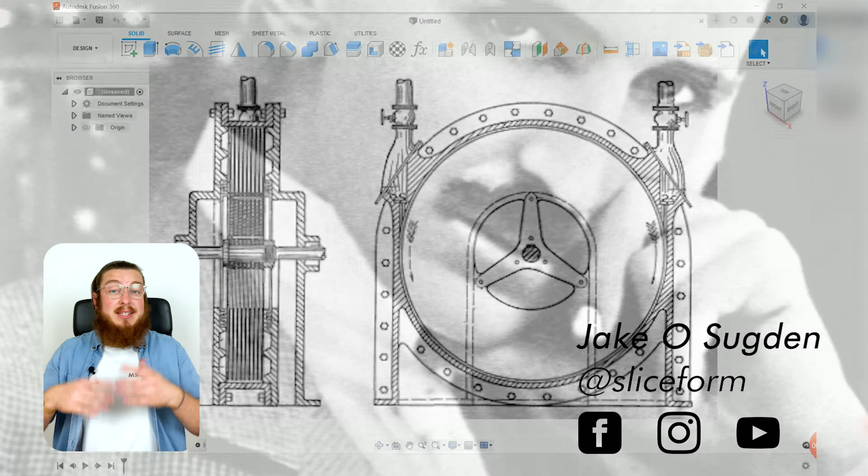So in 1913, Nikola Tesla patented a new type of turbine that he called Tesla's turbine, and it was unlike any other turbine that had ever been made, or to this day. It was a bladeless turbine that could be used to generate lots of power. It was 99% efficient, couldn't produce all that much power, but it could basically last centuries and centuries without needing any maintenance whatsoever. There's actually some Tesla turbines that were made around 1913 that are still running to this day.

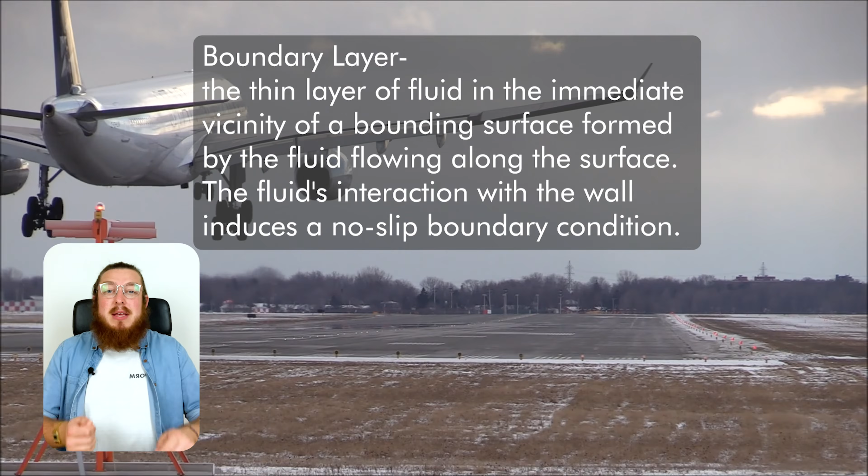This is a really fantastic machinist project if you're just getting into using a metal lathe and a metal mill, and you can make something really, really fantastic. Now, the engineering principles behind this turbine are really, really fun. It's something called fluid dynamics, where you're going to be using a boundary layer effect. Basically, the drag force that a fluid, like air or water or steam, exerts on a surface. And if you blow really hard over a surface, it does drag, it does pull it just a little bit.

So by firing air across lots and lots of discs, the drag force basically starts to spin it. It can't spin with a lot of torque, so it doesn't have a huge amount of power output, but it can spin tens of thousands of times per minute, which is incredibly impressive. Unfortunately, Tesla wasn't able to make it exactly how he wanted to with his time period's material sciences, but right now we can make things as good as he ever wanted it to be. So today we're going to be working from scratch on how to make a Tesla turbine, and then adding in some joints so you guys can see exactly how it would run in real life.

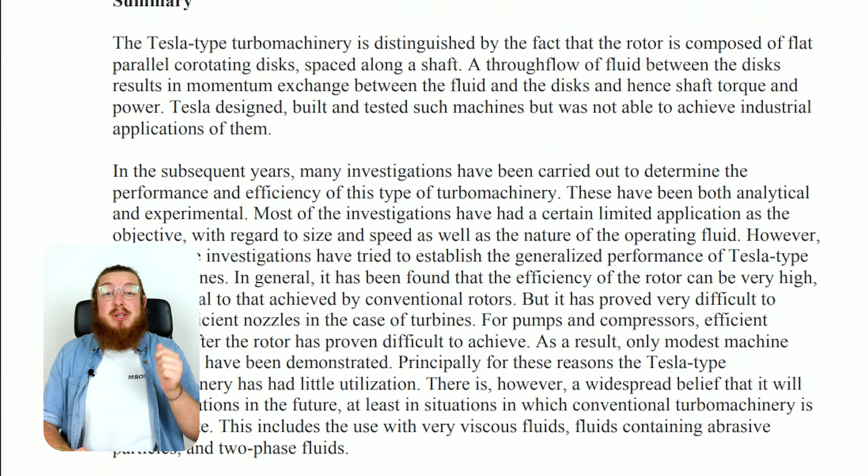Now, the mathematics to build these turbines are really hard. I had to go in a deep dive for one of my theses into Tesla's original patent, and also doing a lot of research on Professor Warren Rice from the Arizona State University, who has done extensive research into this. So big thanks to him, we'll be using a lot of his mathematics and a lot of his ratios to actually produce the best turbine we possibly can.

So we'll be starting off by going up to our data panel, making a brand new folder for our Tesla turbine. This is where we're going to be making all of our projects. And then saving this file as an assembly file. Go ahead and save this, and then we can start on our first component, which is going to be called the housing. This is going to be the large ring that holds all of the pressure inside. Because all of our components are going to be symmetric about the origin, we can be making our housing from the front plane by making two concentric circles, and then we will be extruding them symmetrically on either side.

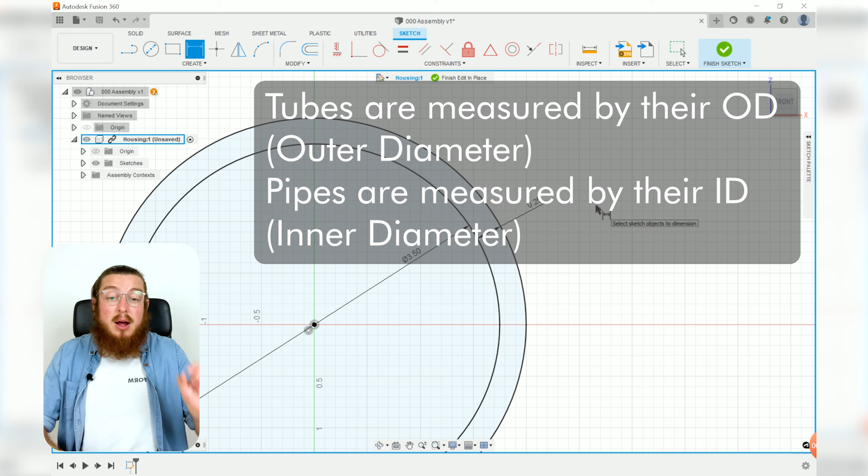We can dimension the inner circle to be 3.5 inches in diameter, and then instead of dimensioning just the outer circle, I want to say the distance between the two is 1/4 of an inch. This is a really important value because anytime you're buying large tube metal, it'll usually say what is the diameter, either the inside or the outside, whether you're talking about a pipe or a tube, and then what is the wall thickness. We're then going to finish this sketch and then extrude this profile, and because we want that origin to be right smack bang in the middle of everything, we're going to be changing our direction from one-sided to symmetric. We want to make the whole length be 2 3/16. We can just say 2 plus (3 divided by 16) in parentheses, and then hit enter.

Now, this housing is also where we're going to be having our steam that will turn all of the turbine coming in from the right-hand side. So we need to be making an orifice or hole in this that is tangent to the inner edge. So let's make that by starting off a new sketch, and we're going to be clicking on the right-hand plane. And we can actually expand our sketch palette and click slice. This will give us basically a slice all the way through our geometry.

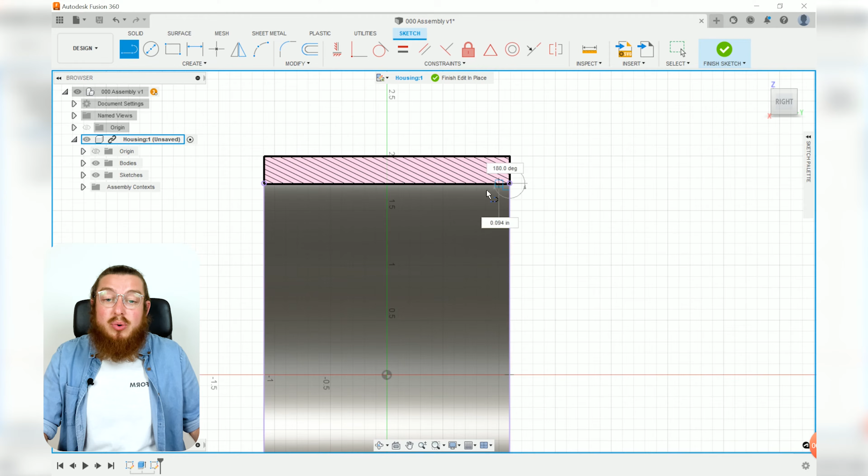And I'm going to click P for project and select this inner surface. That way we can make a circle that is totally tangent to these 2 points. So to do that, we can use our line tool and join those 2 projected points. Then make a circle, and this is going to be 0.84 inches in diameter. We want the center of the circle and our origin to be totally horizontally constrained to each other.

And then we want to add a tangent relationship between the circle and that line that we just made. There we go. Now it's fully defined, and we can hit Finish Sketch.

Now we can flick around our view to the side, and we want to extrude this hole all the way through. We could obviously pull this hole out all the way, or if you'd like, change your extent type to To Objects and then select the outer surface, then you can see that cutting geometry maps perfectly to the curve of the outer surface that we have there. And we can click OK.

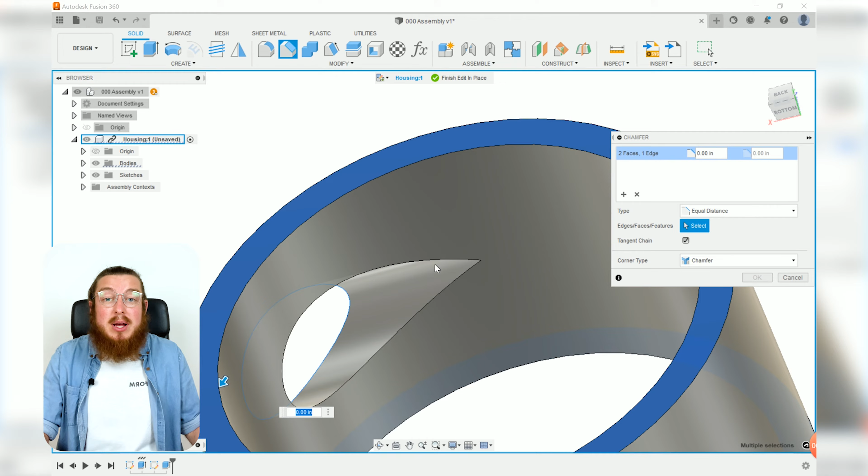We also want to add some chamfers to our piece, so go ahead and open up the chamfer tool, select the two flat faces on either side, and then you want to select the outer edge right here. If you flick around to the inside, you'll notice that as we made a tangent hole, it kind of meets up to a point. So if we add a chamfer to this inside edge as well, those two chamfers are going to cross over each other, and it's going to give us a big warning error. So just two faces and that one edge, and this wants to be 0.04 inches.

So most of these components are going to be made out of aluminum for this project, so we can click A for appearance, and then look up our aluminum, and then click and drag this onto our project. Now that we're done with this component, we can say finish editing in place, and then we want to right click the housing and want this to be grounded.

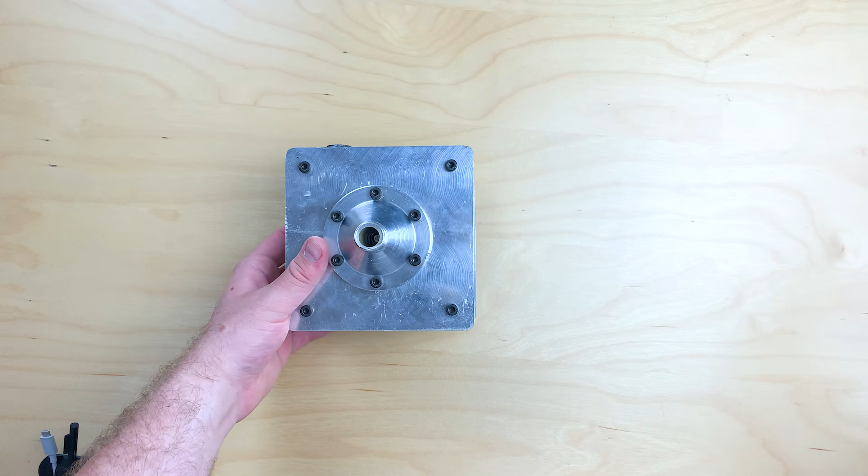So for this component, we are going to be making a sketch on the front plane, and it's going to consist of a rectangle, a very long skinny rectangle, and then a couple lines to make a triangle. Now for all of our constraints, we want this bottom point of the triangle and our origin to be horizontally constrained to each other. And then we also want this left vertical line to be coincident with our origin.

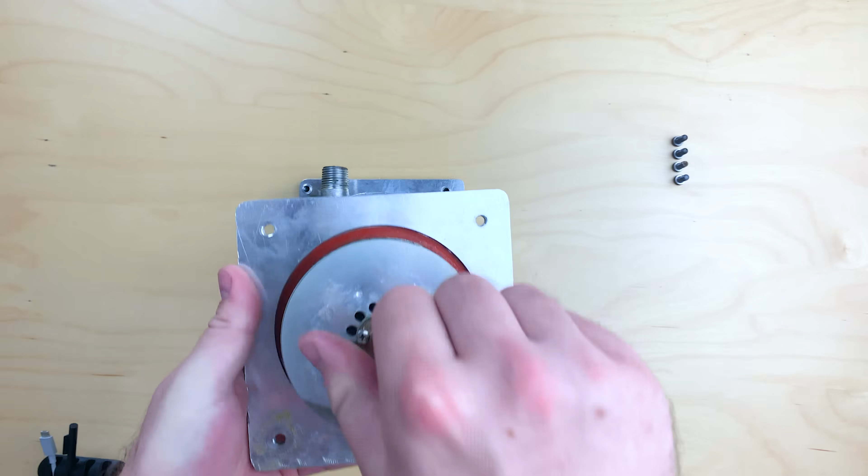Now for all of our dimensions, this outer radius is going to be 0.42 to be mating with that 0.84 inch hole that we made in the housing. The inner radius is going to be 0.31 inches. The entire length of this tube wants to be 3 inches long. And the distance from the most right-hand point of the triangle to the end of our housing is going to be 0.4 inches. And then the angle of this triangle is going to be 30 degrees.

So when we revolve this sketch about the red x-axis, you need to select both of the profiles and then the red x-axis, and this will give us a totally sealed off tube. But what it's going to do is add a pretty perfect funnel for all the steam to be compressed into. And our next step is going to be making a series of holes that we can direct the steam in as efficiently as possible.

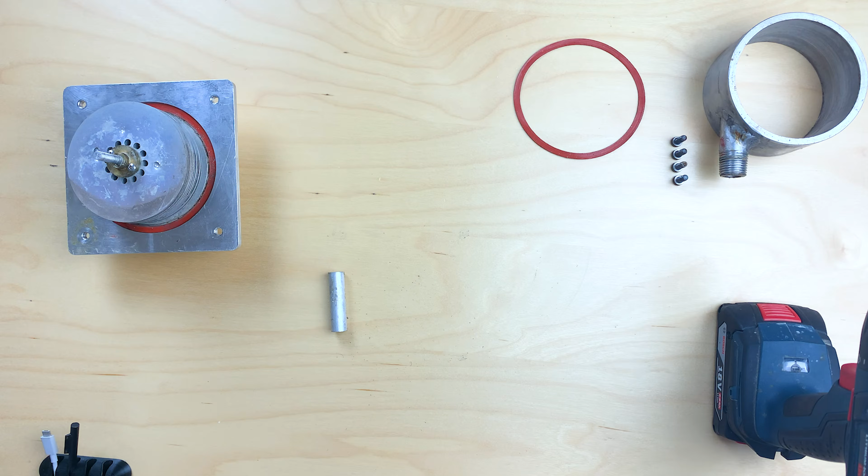So to do that, we want to make a brand new sketch on the end face of our tube. And with our circle tool, we're going to be making 5 circles, all exactly the same size. We can click and highlight all of them and apply an equal constraint to them. And these want to be 1/16 of an inch. That is a perfectly normal sized drill bit that you'd find to do this operation. And then each of them want to be 0.1 inches apart from each other.

What this operation is going to be doing is basically making the inlet totally planar. So we don't have a big hole that's going into just a couple blades. We're actually going to be distributing it along an entire face. The last thing that we need to do for all these is make sure that they can't move up or down. So I'm going to be holding down Control and then selecting all of the origins of all these holes, and then adding a horizontal constraint to these.

And as soon as we finish this sketch, we can extrude all of these 5 holes. And we don't really need to have any dimension specific, just as long as we can click and drag and have it cut all the way through, that's fine. And then as you can see after hitting OK, we do in fact have those holes cutting all the way through our piece.

Now very often steam is being run through high pressure, high temperature resistant pipes. And anytime you're in America and you're talking about pipes, there is in fact a pipe threading standard called NPT. Unfortunately, we don't have this capability for external threads within Fusion 360, but we can get pretty close by adding an ISO pipe thread. The only difference is that the TPI is slightly different, and US NPT pipe threads actually have a taper to them, making it easier to basically screw in.

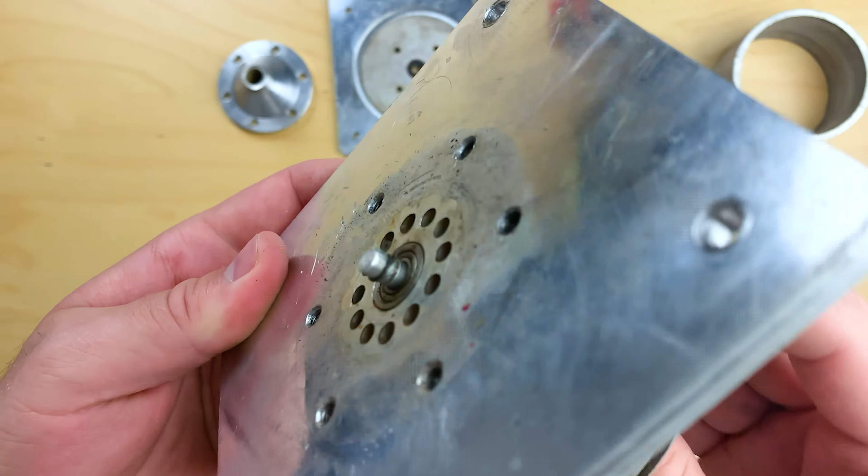And then we'll just click and drag this where it's supposed to be. We can click P for project and then select the outer edge, where we can make this collinear to. And because we know the outer diameter of this piece is 0.42 inches in radius, we can just type that in based on the distance to the origin. Then we can have a revolved cut for all of this about our red x-axis. And as you can see, this gives us a very nice large chamfer.

Now this part is also going to be made out of aluminum, so we can click A for appearance and type in ALUM, and you can see it's popped in right there. And if you find that you use this appearance all the time, you can always right click and add it to your favorites. I already have it in my favorites because I use it all the time, but instead of having to type it in every single project, just add it to your favorites. It saves a ton of time.

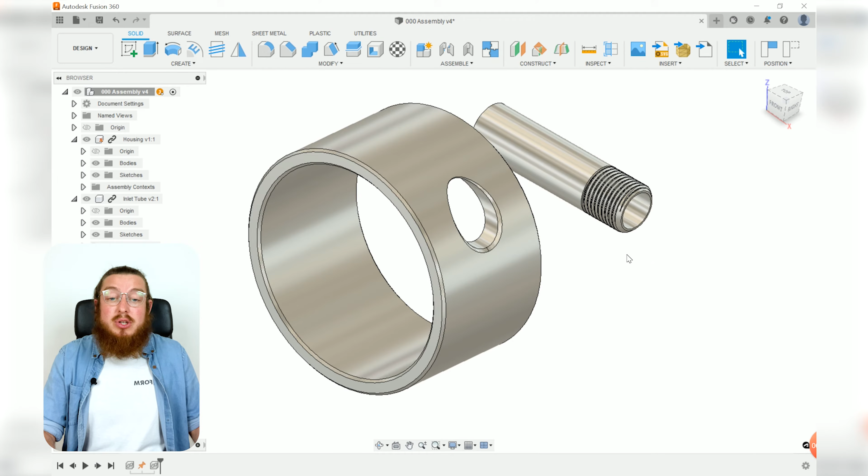But we can close this out and save this file, then head back to our main assembly and update this file. So now that we have our two components, our main housing and our inlet tube, we can click and drag this around in a way that's not ideal. So let's add a joint between these two. We want a joint on the outer edge of our circle, and even though this is not a perfect circle, we can actually click on it. As I move my cursor around that curved hole, there are these two endpoints I can snap to, and that's where I want to click. Then it moves it over.

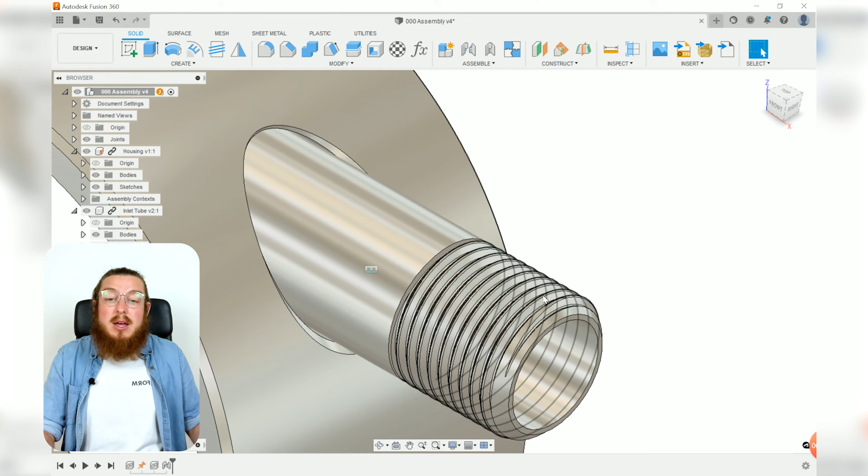But this is still set to a revolute joint from the pizza cutting class, so we'll just make this into a rigid joint. We also want to click on one of these arrows and pull it out a little bit, because we want to get access to all those threads. So we'll be pulling it out 1.25 inches and then clicking OK. As we can see with our two components, our inlet tube is actually crashing into the inside of our housing, which we really don't want.

So we can use the edit in place window to help us cut out this section, because it's going to be based on the geometry of the outer housing. So we can go over to our browser, put our cursor over our inlet tube, and click the little pencil icon. And then we can make a new sketch on that front plane, which, as you remember, cuts right through the very middle of the housing.

Then we can click P for project, and then select the inner surface, or the inner ring. There we go. And then click OK. And now we have a profile that we can now extrude cut symmetrically. If you change your direction to symmetric and then pull it either side, you can see that we completely cut away the unnecessary material for our inlet tube. And then by hitting Finish Edit in Place, it is now perfectly cut.

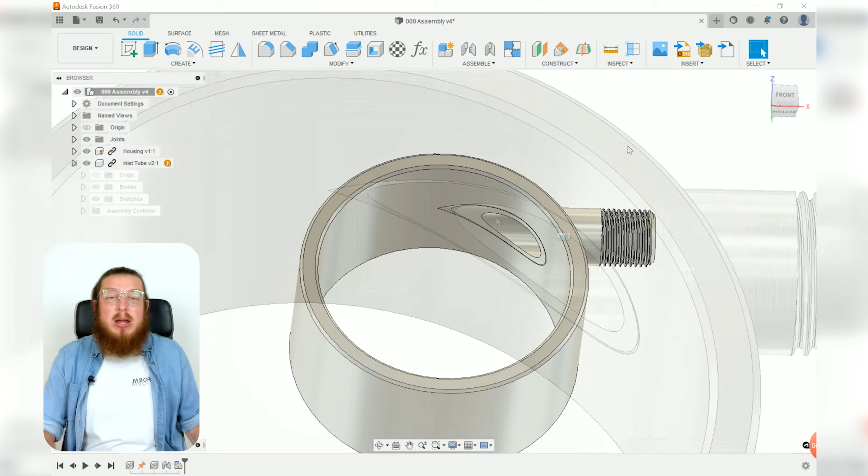Now our next components are going to be two gaskets that you can find on either side of the wall. These are basically two rubber discs that we can apply pressure to, and it will hold the steam in really, really well. They are two very simple components, but they need to be in the right location or else they won't work. So we'll be making a new component, and this one can just be called gasket. And after we click OK, we can make a new sketch, not on the front plane, but actually on the outer face of our housing. Then we can use our project tool and select the very outer and the very inner edge and click OK.

Now this gasket does not need to be very thick, so we can just finish the sketch and then extrude out these profiles. And we just want to pull them out 0.03 inches. Again, gaskets do not have to be very complicated, but they are very important. If we didn't have gaskets, then we wouldn't be able to hold in any pressure or any fluids inside any of our mechanical systems.

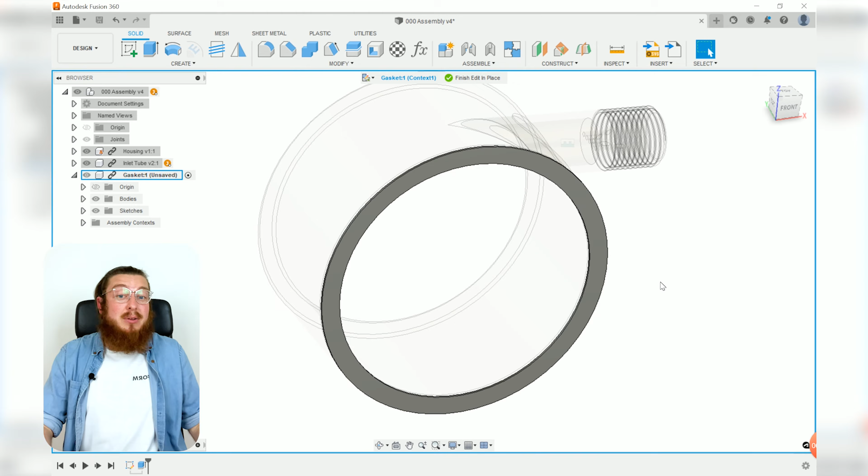We can also add in an appearance. Gaskets are usually made out of either cork or rubber. So I'm just going to be adding in a soft rubber appearance to this. And very often, gaskets come in all different colors. One of them that's really common is a bright red. So we can double click on the rubber and then change around the color to the top left corner. And this will give it a really nice, lovely red.

Now this component is all done, we can say finish editing in place, but we do want a gasket on the other side. So instead of having to make another one, we can actually just click M for move and select the component of our gasket, and then move it over with our create copy already checked. And we can move it over until it's about in the right location and then click OK. Now our right gasket is in the correct location, so we can make it fully solidified by using the as built joint by selecting the housing and then the component itself and then clicking OK.

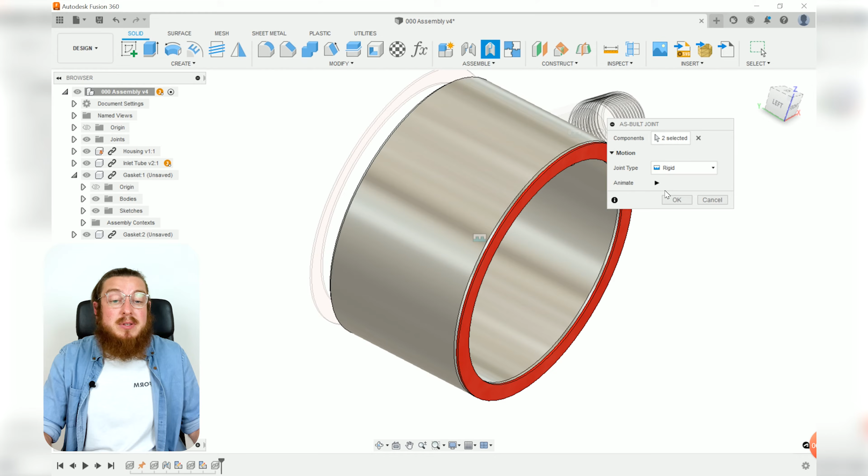But our other gasket is kind of free floating, and this is where we can put in our joint. We want this face to be fully secured with our housing, and we want our joint origin to be right at the very middle. So we can select either this outer edge or this inner edge, but it's really important we select on that wall. Then we can flick around the other side of our housing and select either face or either edge. And then those are fully mated, and we can finish off by clicking OK.

Now in an industrial setting, gaskets are usually made just by punching them out with really big steel knives. But another way to cut gaskets is just to laser cut them. If you go down to your local library, there is a good chance that they actually have a laser cutter and a set of 3D printers that you guys can use.

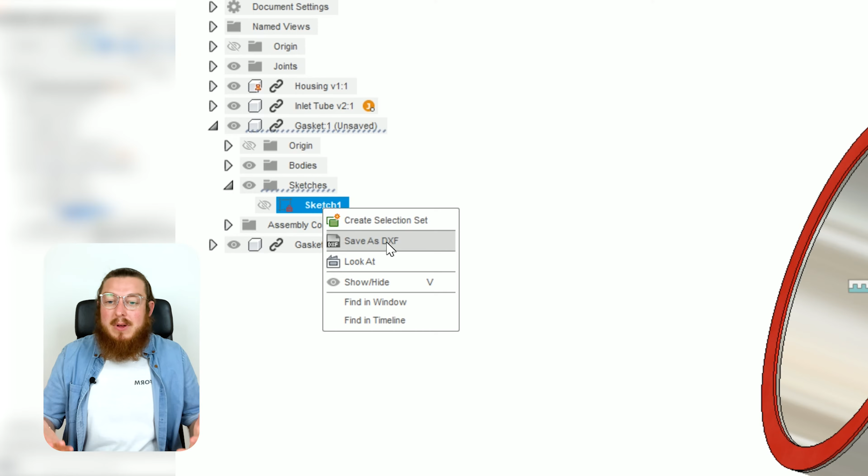So in the gasket, in the browser, we can actually expand the sketches area. So it says sketch 1, we only had one sketch, and then right click it and you'll be able to see we can save those two circles that are the right dimension as a DXF. This is kind of like a 2D PDF vector that laser cutters can use really efficiently. So you can save that if you'd like to make this in real life and if you have access to a laser cutter.

Now our next component is going to be our central axle. This is what all of our discs are going to be held to, and it's what's going to be revolving around all of our housing. So we can make a new component. Like I said, this one is going to be called the central axle. And we want to be making this as its own separate file. So we don't even need to finish it in place. We can just save this file and then open it up as its own standalone file.

To make this project, we can just go into Create, Cylinder, and then select on the front plane. Remember, this is going to be extending away from us. So we can click on the origin and pull outwards. This is going to be a 0.25 inch diameter rod. Hitting enter, and then we want to be extruding it 3.5 inches.

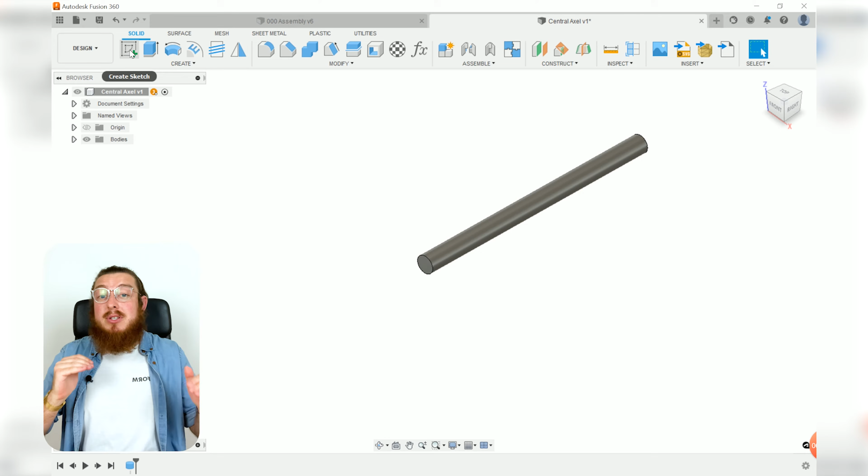Now we're going to be having some cutouts on the top and on the underside of this central axle, and that's how we're going to be joining all of the discs to some of the mounting hardware to the central axis. These flat sections are going to be a really good area for some set screws or grub screws to tighten down really well. So to make these, we're going to be opening up a new sketch on the right-hand plane this time. I'll be making two rectangles.

And these are going to be having the exact same width and the exact same height. We can also add in a collinear relationship to the underside of both of them. So as soon as we move one of them down, it moves the other one down as well. So to dimension these, we want to say that the underside of these rectangles to the origin is 0.1 inches away. We can say the distance from the left-hand side of the left rectangle is 0.45 inches away.

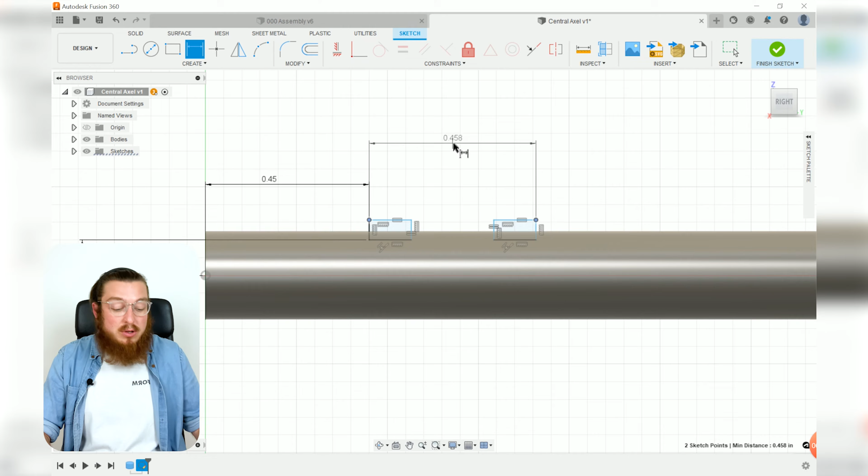The distance from the outer edges between the two rectangles is 1.94 inches, and the width of both the rectangles are 0.2 inches. Very, very small. We don't really care about the height of this rectangle. As long as it's above our central axle, that's fine, because we're just going to be cutting them through. We can finish this sketch and then extrude out those two profiles, and we want to be making these symmetrically extruded out either way.

We can click OK for this, and then we want to mirror that feature, that extrusion, about the very top plane. So we have two of the flat sections on top and two of the flat sections on the bottom as well. And because this central axle needs to be really incredibly strong and it needs to withstand a lot of rotation and a lot of torque, instead of aluminum, we are going to be adding a stainless steel appearance to this.

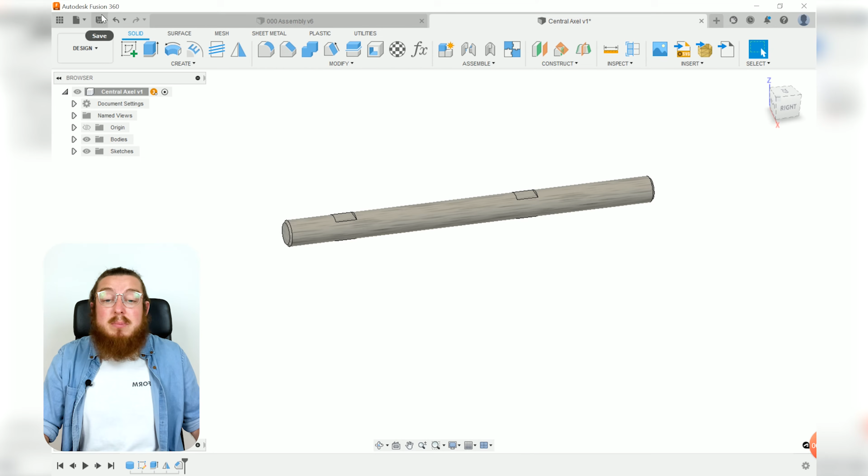Now we're going to be adding some chamfers to the ends of our edges, so they're not super duper sharp. These can be 0.02 inches, nothing too major, and this component is all done. So we can save this and then go back to our assembly file and update it. But because this is a part of a sub-assembly, I don't actually need it to be right in the middle of all the other components.

This is actually going to get in the way really quickly, so you can just click and drag this away from it. So we'll be having basically two different sub-assemblies. That will be the housing, or the stator, and then all of our discs, which will be the rotor. So the stator is stationary, the rotor is rotating.

Now our next component are going to be things called brass shoulders. These are basically going to be two large chunks of metal that we can pass a thread through, and so when we put in all of our discs, these will be able to compress and add a good sense of stability to these. Brass is a really easy material to machine in metalworking, but it also has a pretty substantial density.

So when we have all this high RPM, because we have such a high weight associated with it as well, we can produce much more torque. But all of the weight is going to be closer to the central axis, so we have a higher sense of stability with it as well. So we can click OK, and just like before, we are going to be making this not in the Edit in Place window, but as its own standalone file.

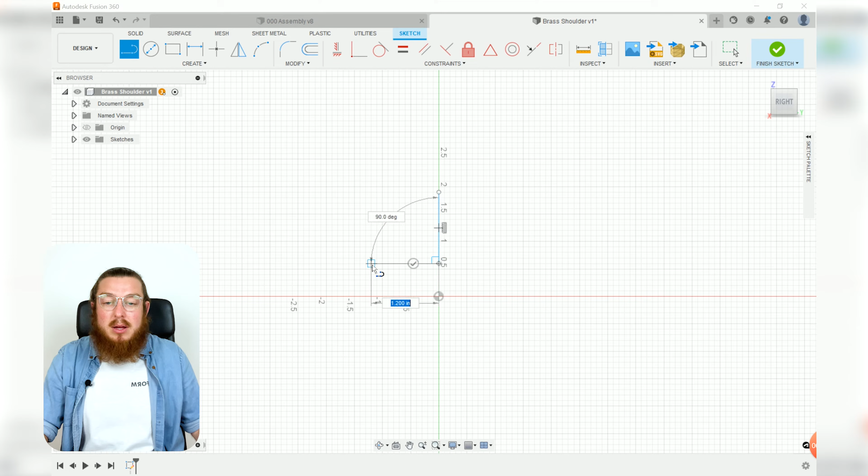Now to make this revolved part, we're going to be making a new sketch, and we're going to be working on the right hand plane, so all of our components are about in the right location. And using our line tool, we are going to be making kind of a letter L on the left hand side of the origin. As far as constraints go, we're going to be adding an equal constraint to these two top horizontal lines, and we're also going to be adding a coincident relationship between this vertical line and the origin.

Now, as far as dimensions go, we want this to be riding over the central axle. So we're going to be making this radius 1/8 of an inch.

We also want to make this top flat section 0.2 inches. We want to make the outer radius of this little shoulder right here 0.225. And the entire radius of this back section is going to be 0.45 inches. So we're going to finish this sketch and then revolve this profile around the green y-axis.

And then we need to have two holes, one on the top and one on the bottom, to allow for two really long bolts to pass through. So we're going to make a new sketch on the front plane, and our two circles are going to be equal diameter. So you can just add a little equal constraint to both of those. And then we also want them to have a vertical connection to the origin as well.

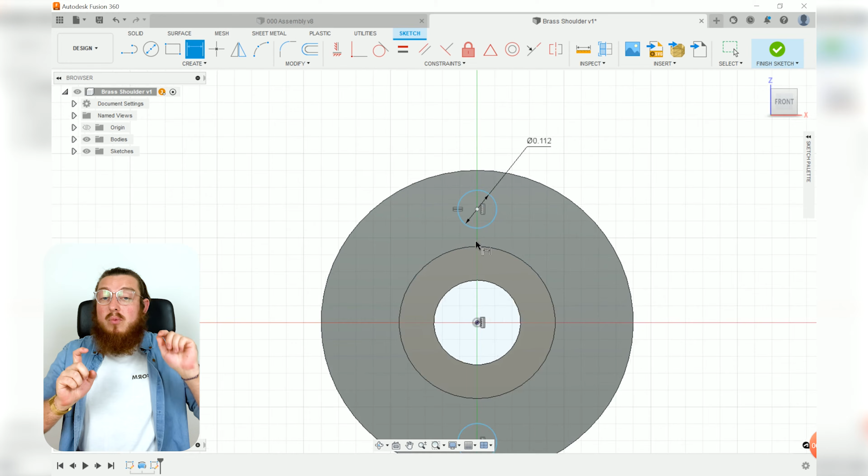Now the diameter of this circle is going to be 0.112. This is a funky number because it's going to be the drilled diameter of what is going to be tapped, which is always kind of a strange one. But the distance between the center of the circle and the origin is going to be 0.338. And that's going to put it smack bang in the middle from this top point to the top of this outer circle. And we're going to do the same thing for the underside.

We can now extrude these two profiles all the way through our parts. Again, doesn't really need to be anything too crazy. As long as they cut all the way through, we'll be okay. We also need to add two drilled holes that go perpendicular to our axis. So we're going to make a new sketch, this time on the right plane, and we can also cut it in half if we'd like. So we can always click slice in our sketch palette.

And we're going to be making a circle that is horizontally constrained to the origin. And this is going to be 0.112, the same diameter as our upper pieces. We can project this entire internal bore. And then we know that the center of the circle wants to be 0.1 inches from that outer face.

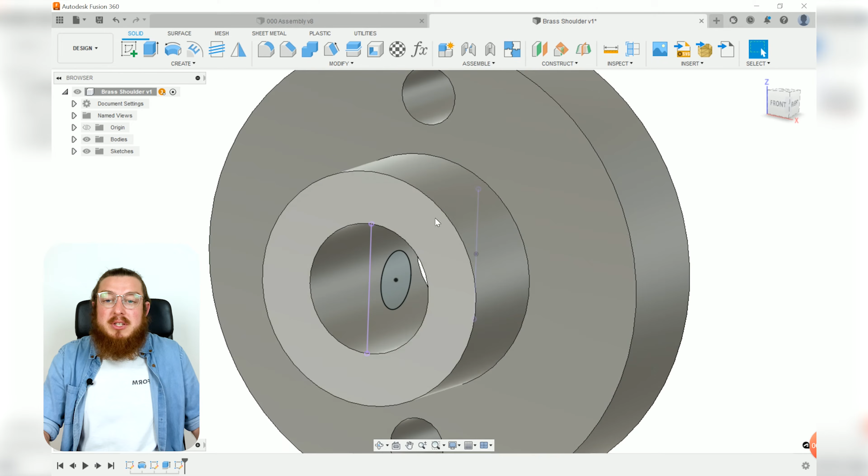Now this circle that we've made wants to be symmetrically extruded either side. So go ahead and change your direction to symmetric and pull it out so it cuts all the way through either side. And then we want to add a nice little chamfer over the entire thing. So go to your chamfer tool, highlight your entire piece and make it 0.01 inches. There we go.

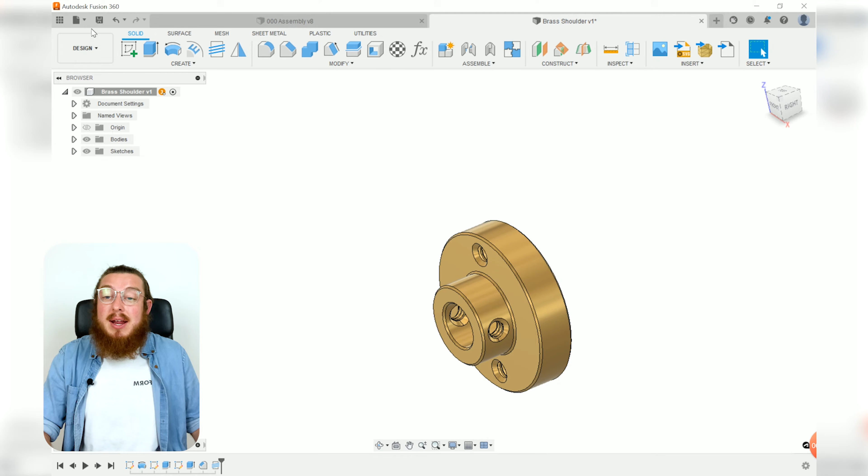Now we're going to be adding a threaded feature to all of these holes that we just made. So we can select all of these inner faces while holding down Control, and it should automatically go to a 4-40 unified thread. We want this to be a threaded feature, and then we can just click OK. And because this is a brass shoulder, we want to go ahead and add a polished brass appearance to this as well. And this component is all done. So let's go ahead and save it, and then go back to our assembly file and update it.

So we can click and drag this brass shoulder over to our central axis, and this is where we can add a rigid joint to it. So add your joint, and we want to click the outer edge of our brass shoulder, and we also want to do the same thing to our central axis where the notch is closer to the edge.

And as soon as we do this, we also want to rotate our piece 90 degrees so that the threaded hole lines up with the flat section on our central axis, and we want to pull this in 0.45 inches. This is really nice because it means the very center of our bore will go right into the dead center of the flat section that we made in our central axis. And then click OK.

Now the next component that we make, this will be the really important one. We are actually going to be making the discs which will actually be able to spin our rotor. So let's make a new component. This one will be called a rotor blade. Click OK, and we want to make this in its own separate tab as well. For this sketch, we want to make it on the front plane.

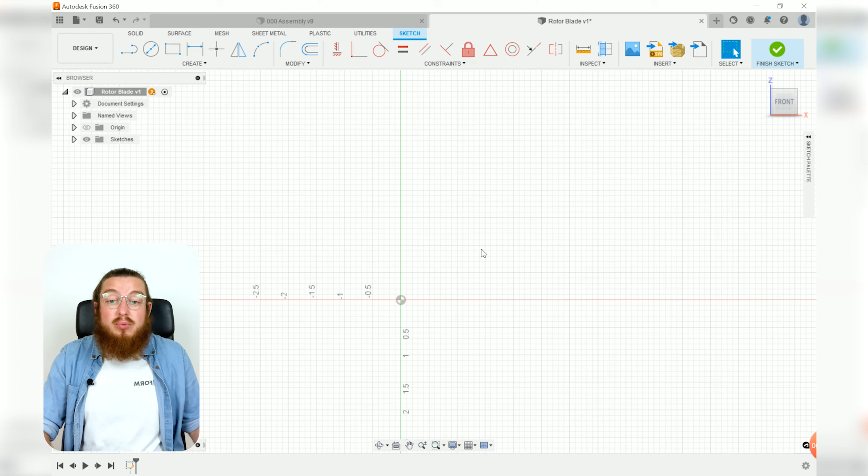And because this is a rotor blade, we're going to be using the circle tool to make a really large outer circle, another smaller concentric circle that will fit over our central axis. We want to make two small circles on either end that will be passing through our brass shoulder, and then one larger circle just above.

We can add all of our constraints to these, so we can click the center of all of these three horizontal circles and add a horizontal constraint to that, and then one vertical constraint between these two circles as well. So we'll start off our dimensions by setting this inner circle to be 0.25 inches. That will go over our 1/4 inch axle. These two circles will end up being 0.125 or 1/8 of an inch, and we can also add an equal to both of these circles so they become the same diameter.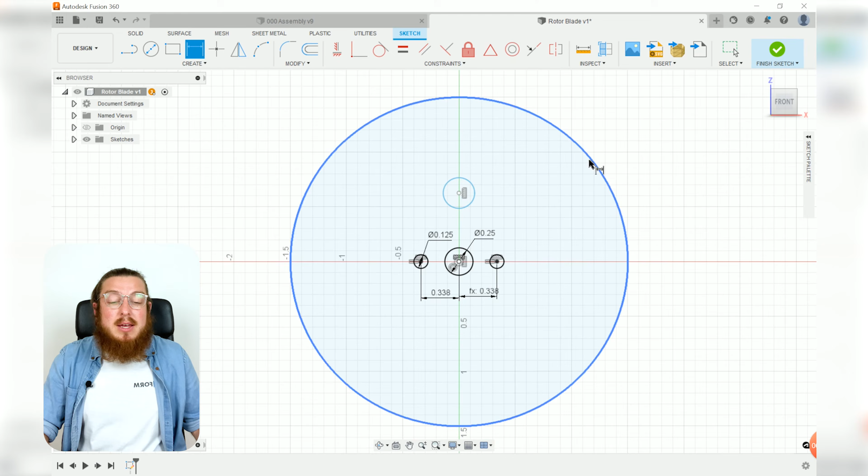We also want to set the distance between the origin and that circle to be 0.338 so that it lines up with the holes that we drilled out on the brass shoulder. And we'll do the same thing for the other side. Now this outer circle here, this is actually fairly interesting. So this has to fit inside the internal diameter of our housing, so 3.5.

But because of all of the fluid dynamics, we want it to be just barely smaller. In fact, we want it to be about 2% smaller, so that we still have some wiggle room so the blades don't accidentally rub up against the inside of the housing, but we don't want to have any fluids, or minimal fluids, actually just spinning around and not exiting through our system. So we can type in 3.5 multiplied by 0.98. That'll give us the 2% smaller that we're looking for.

Now this top hole right here, which we will dimension to be 0.188 in diameter and 0.55 inches up from the origin, this is going to be our exit hole. This is where our steam is going to be passing through our discs and then out of the housing essentially. But just one hole isn't going to work for us. We need to add a fair few more. So let's go to our circular pattern, select our circle, our center point is going to be our origin, and then we're going to be making 6 of these holes.

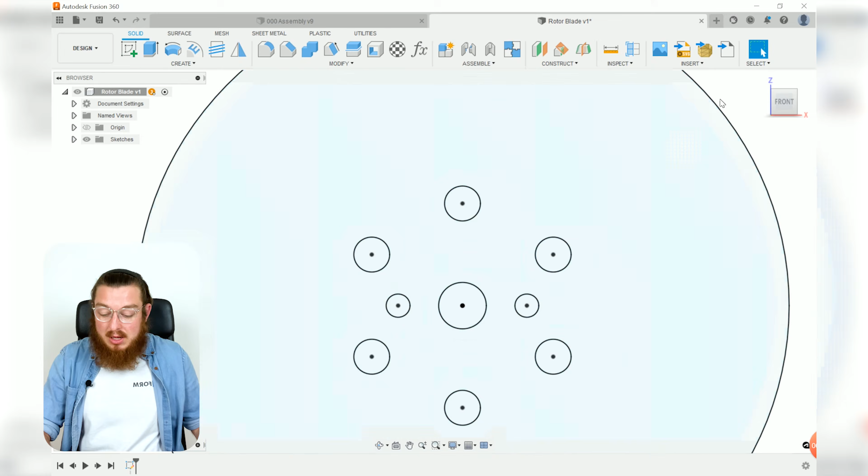So with the sketch all done, we can finish it and then extrude this surface 0.015 or 28 gauge aluminum. We also want to be adding on one of our polished aluminum finishes to this, as these are made out of really thin aluminum. And then we can save this part and then go back into our assembly, and this is where we can fit it over our brass shoulder down there.

So we can bring that over, and we want to make sure that in our joint this face and this edge line up with the underside of this bolt of our brass shoulder right there. So this will mean that both the rotor and the brass shoulder are absolutely perfectly fit together, and they both line up on the same axle.

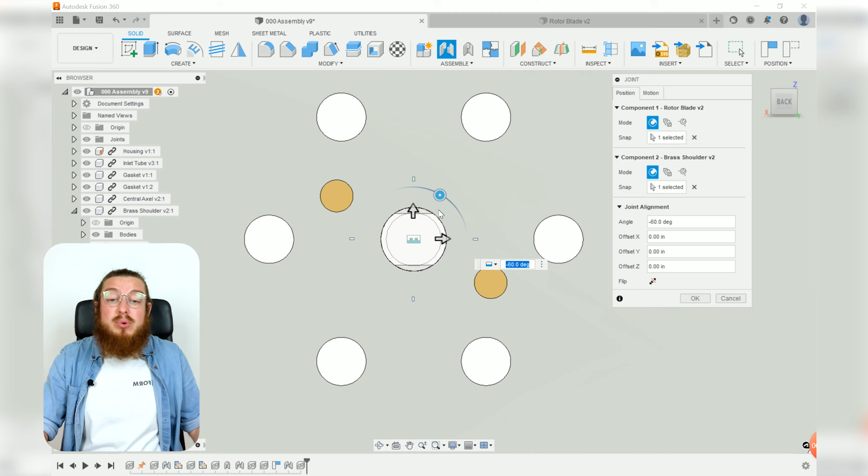We also want to verify, if we go around to the back view, that yes, the holes that we have going through our brass shoulders and the holes that we have going through our rotor blades are totally aligned. If for some reason when you were making this, it brought it in sideways, then you wouldn't be able to see the through holes, which we don't want. So we can just click OK for that.

Now our next components are going to be the spacers that fit in between one of the discs and then the next discs. And these can be made out of the exact same material. And the reason that we chose such a thin bit of aluminum is because, funnily enough, the ideal width between two discs, or that gap, which is the most important part of this entire turbine, is 2 times the thickness of this blade. So for every gap in between them, we'll just insert 2 of these spacers.

So let's make a new component. We're going to be titling this the Rotor Spacers. And again, we're going to be making this as its own separate individual file. For this component, we are going to be making a new sketch on the front plane. This will be a large 0.9-inch circle. This is basically just going to crest just below those 6 holes for the outlets, so these spacers don't block the steam from exiting.

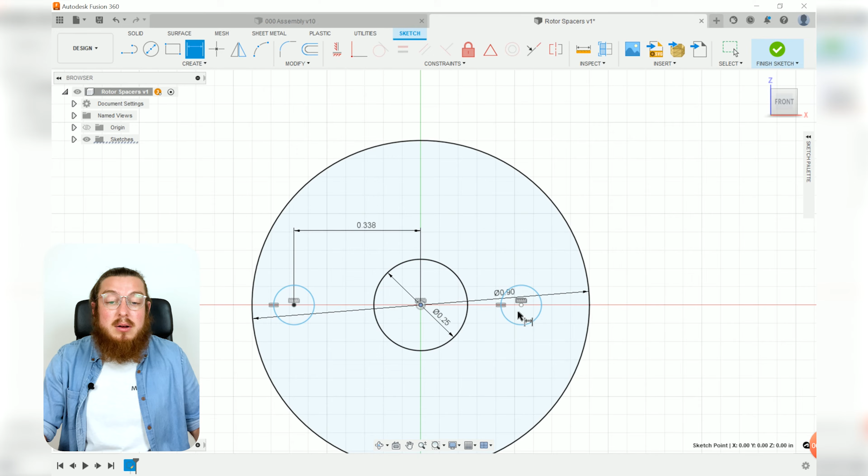We're also going to be having a central 0.25-inch hole going through the middle that will slide over our central axle. And then we also want to have 2 circles on either side. These can be totally equal in diameter, and we can make the very centers of these 3 circles totally flat. Oh, there we go as well. The distance from the center to these circles, again, is going to be 0.338 on either side. And then the diameter of these holes is going to be 1/8 of an inch.

And then when we exit the sketch and then extrude it, it's going to be to the exact same thickness, so 0.015 inches. Again, this is always going to be the same material, that polished aluminum that we have. And this component is all done. It's a nice and fast one, which we like.

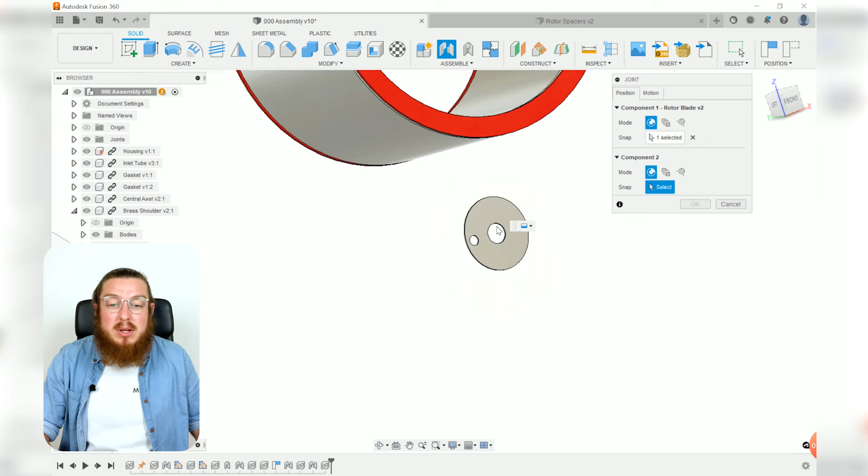Going back to the assembly, we can update this. Our component is going to be, there we go, it's a little hiding. And then we can add our joint. So again, we can add it to the inside face. There we go. And then we'll flick around to the other side of this joint and select it there. And then when we click OK, if we pull it out, we can see that we've got our rotor disc right here, and then our spacer just in front of it.

Now, like I said, we do want to have 2 of these. So I'm going to click M for move, and I'm going to select the spacer as the component that I want to move, but I also want to duplicate it. So let's check create copy, and then let's move this out the thickness of our material. That would be 0.015, and then click OK. And as you can imagine, because it's already in the right location, we can just use an as-built joint to connect these 2 components, and then click OK.

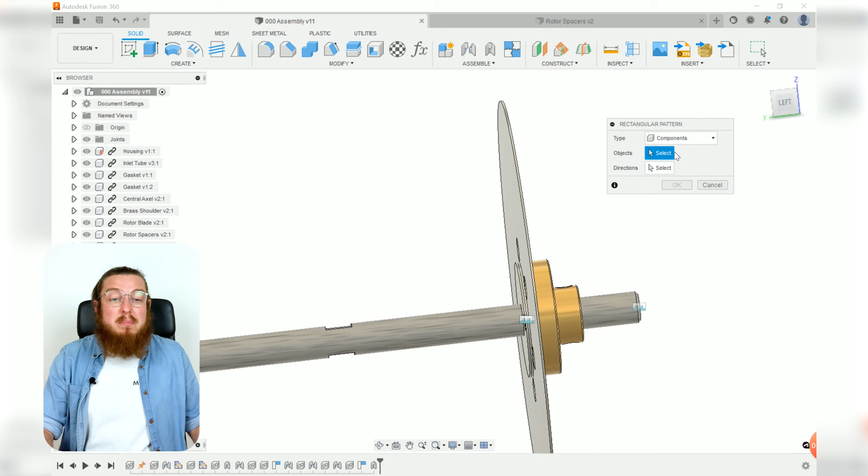Now, just one disc is not going to be tremendously useful. We're not going to get a ton of power output out of this, so let's add a bunch of them. In fact, we need to add 25 more of these. So we're going to go into our Create menu, Pattern, and then Rectangular Pattern. For our type, we want to change this over to Components, and the objects that we would like to multiply are going to be this large rotor disc, and then our 2 smaller spacers. You could also go to your browser and select these 3 as well.

The direction that we would want to pull it is going to be in the green y-axis, because we haven't rotated this subassembly at all. We've just translated it within the workspace. We can pull them away. Like I said, we want to make 25 of them total. And then instead of the extent, we're more worried about the spacing. We want them to line up and nest really neatly. So the spacing between all of them is going to be that 0.015 multiplied by 3. We don't need any in the other dimension, so we'll just leave that as 1. And then click OK, and you can see we have all of our discs in place.

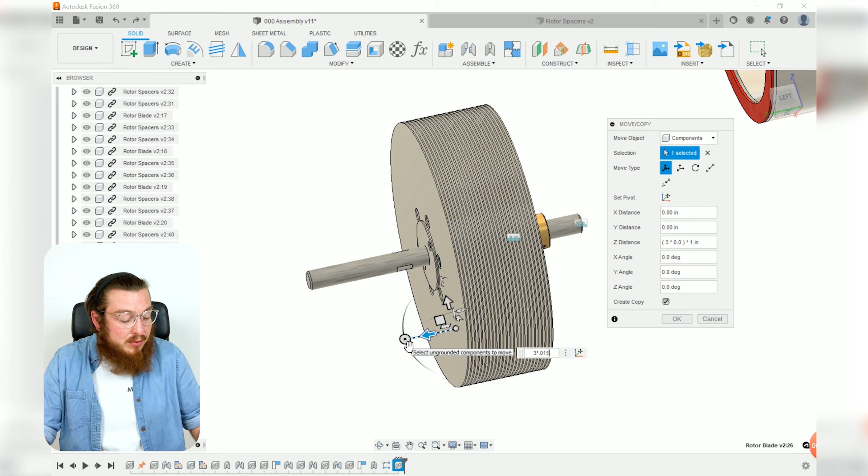Great. And then to finish off this stack of discs, I'm going to click M for move, select the most recent disc. I'm going to say create copy, and then pull this out the distance of 3 times 0.015, which will line up perfectly with the rest of all of our discs.

There we go. Now currently, if you take a look at the browser, you'll see every single spacer and disc that we have is now on one gigantic list. And instead of the browser being a really organized place to see all of your components and sketches and everything associated with it, it is now just a jumbled mess. It's a minefield of really, really difficult things to see. And to be honest, I don't care about most of these components. Rotor spacer v2.6, I don't really care about it. So you may as well compress all these into a single sub-assembly. And that's exactly what we're going to do.

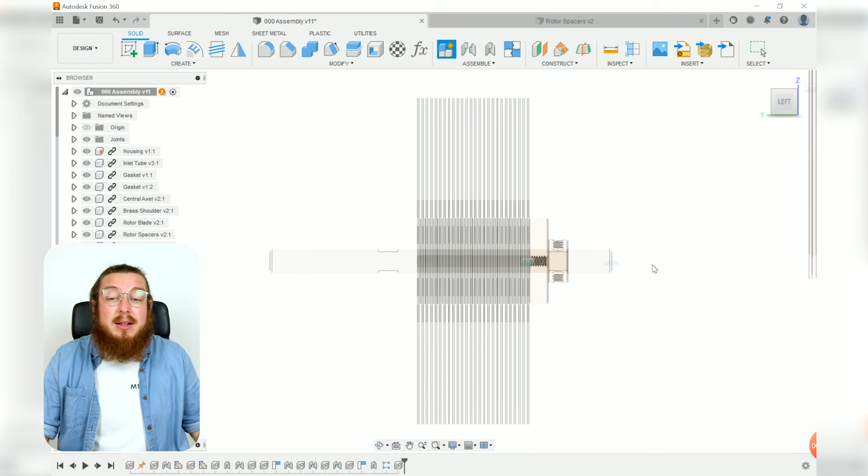We are going to be making a new component. This time it's going to be an internal component. And we can basically group them all together to say all of the discs and all the spacers are in this internal sub-assembly. It is internal because it is inside the main top file. So by clicking OK, you'll see it pops up right at the very bottom.

So we want to highlight all of these inside our browser. So we can select the very top rotor blade that we have, scroll down to the bottom, hold down Shift and click the bottom rotor blade. This will highlight all of the discs and spacers in between. And then we can just click and drag this into the sub-assembly. And now you can see it is all compressed in there. We've got our main assembly, and then we've got our sub-assembly over here as well, which is really nice.

We can also do a similar operation to our timeline as well. We can select the very first feature that we have right here, which is basically just saying move this component to a sub-assembly file.

Then we can zoom over to the other side of our timeline, hold down Shift again, click that last feature, and then this will highlight every single one of these features that we can then right-click and create a group, which will push them all together. So now we've got all the features nice and organized, and all of our components nice and organized. But currently they are all still free floating.

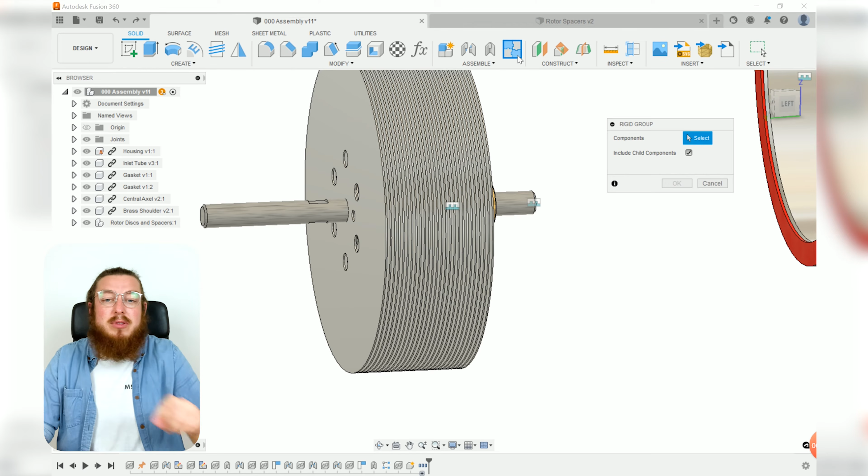And so because we have way too many components to individually go and as-built joint for all of them, we can just add in a rigid group. So we can just select this internal component which houses all of our components, hit yes, hit OK, and now it has fully rigidly locked all of these.

So like I said, we do only have one brass shoulder. We also want another one on this backside. So again, we're going to be using M for move. I'm going to be selecting this component, hitting create copy, and then moving it over to the other side. And we do want to rotate this 180 degrees, so it's in the right orientation, and then click OK.

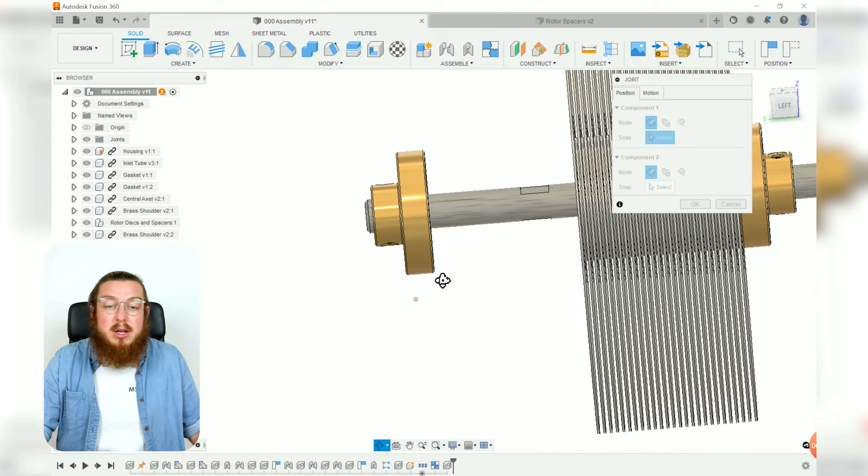And then just by typing J and adding in a perfectly normal joint, we are going to be selecting the inside ring of this brass shoulder, flipping our view around and clicking the outside edge of this rotor blade. That'll push it into place, and then we can always get a head-on view, there we go, to make sure that we do have a hole running all the way through both of our brass shoulders, and then clicking OK.

Now to join all of these components together, we can insert two really long skinny bolts through the threaded section of the brass shoulders, and we can do this by adding in a McMaster-Carr component. So you can just type in your code that you can grab from your packet, and this will add in a very long 1.5 inch 4-40 thread. Again, we don't want to add in a SolidWorks file, we want to put in a STEP file, which is very similar to an STL that we use in 3D printing, and then we can download this.

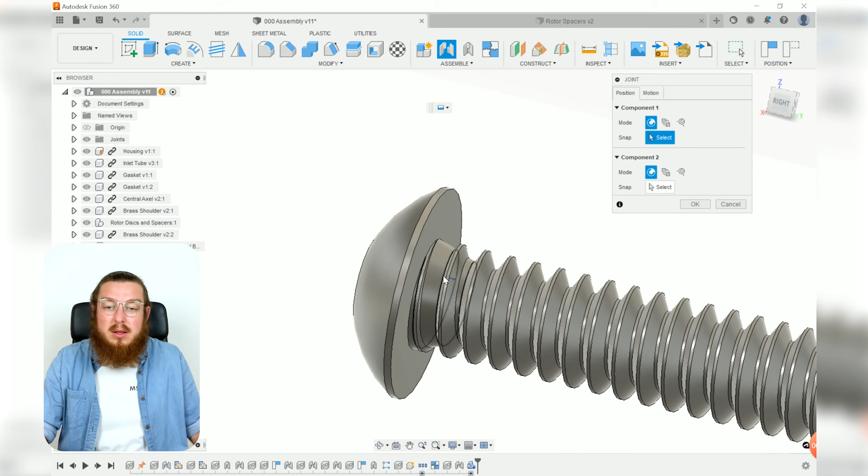So we'll click and drag this component a little closer to where it needs to be, and we can also rotate it so it's in the right orientation. This isn't absolutely necessary, but getting it about close does help. Then we can add in a joint to the underside of our bolt, flick our view around, and then do the same thing to the outside of the brass shoulder. This will now insert this bolt all the way through one brass shoulder and then screw into the backside.

To make the other bolt, again, we're going to be typing M for move, selecting our bolt component. I would like to make a copy, and then I'm going to be moving it over to the other side. And because we know the distance between these two, we can just type in negative 0.338 times 2. So it puts it perfectly on the other side, and then clicking OK. Now this bolt is already in the right location as well, so we can just have an as-built joint between two of these components. Any two components work, to be honest, and then everything is rigidly locked together.

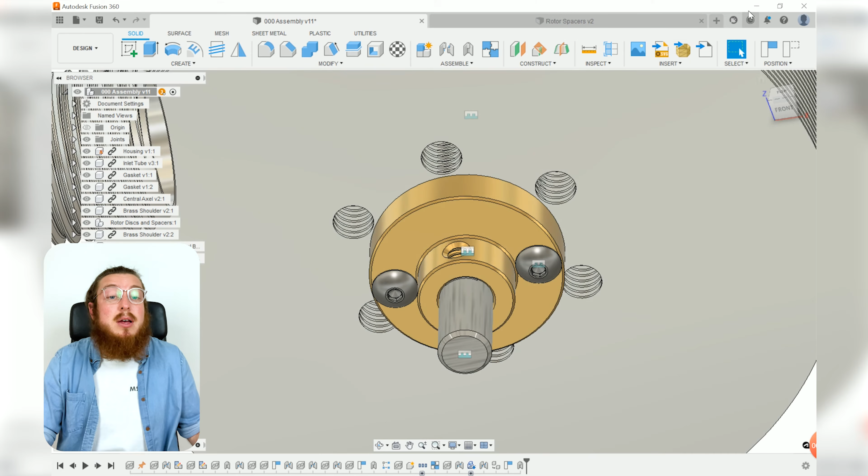To join the brass shoulders to the central axle, we're going to be putting in some more hardware. We're going to be putting in some things called grub screws or set screws. We need 4 of them, and they're going to be going through this perpendicular hole and then setting onto the flat section that we cut on that central axle. So we can open up another McMaster-Carr component and look up this file. It's already set to 3D STEP file, so we'll just download that and then bring it roughly into place.

Then we can click J for joint, and we want to add it to the underside of our STEP file. And here's kind of a funky thing. If we have almost a square or a rectangular shape on anything, you can snap to all corners of it and the very center, which is really handy. So if we get a top-down view, you can see that we can snap to that middle, and there we go, it's already put in place. We don't need to take away the brass shoulder or hide or do a cut or anything like that, already built in place. So now I want you guys to create 3 more of these bolts and put them in the right locations.

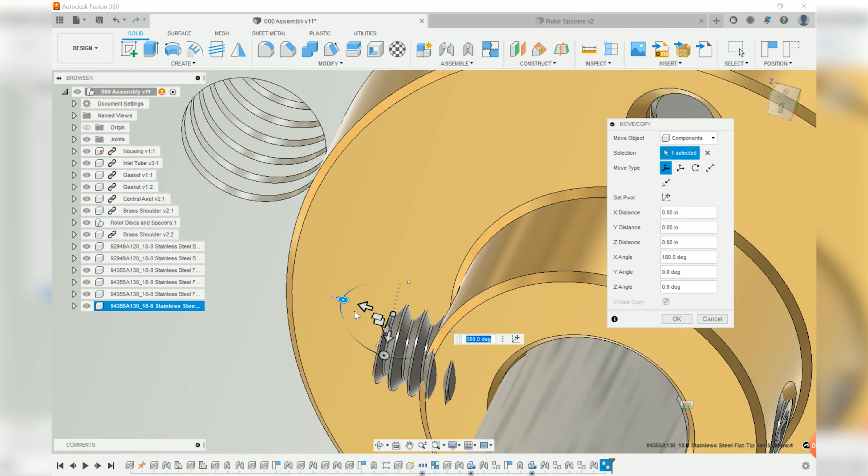Our next components will be the 2 walls that will cap off either side of the housing. So these again are going back to the external components, and we're going to be making the first one, called the power side wall. This is going to be located on the left-hand side, where all of our power transfer can actually go towards a generator. So we don't need to edit this in place; we can make this as its own separate file.

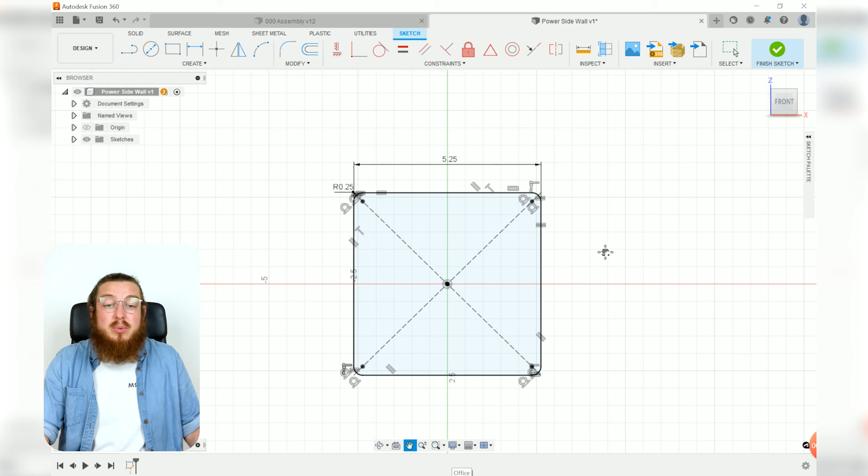So to make this, we'll be making a new sketch on the front plane, and we'll want to make a center rectangle at the very center first, and then we'll be adding on some 1/4 inch radii to each corner. The radii we can put in a dimension right now. It doesn't really make too much of a difference, but we also want to add in some equals to the 2 walls. This will make it a square with rounded edges essentially, and we can dimension the entire width to be 5.25 inches. We also want to be adding in a center circle that is 0.55 inches in diameter. This will then house a bearing that we're going to be putting in a little bit.

We can also put in another circle in a top corner that is coincident to these construction lines, and these circles want to have a diameter of 13/64. This will give us just enough clearance for our bolts to pass through these holes, and these want to be 1/2 inch from the edge. Now we do need 4 on all corners, so we may as well add in a circular pattern. So that's the circle that I would want to pattern about the very center. I would like 4 of them, and that pops them right in the same location. Then we can extrude this part out to 0.25 inches.

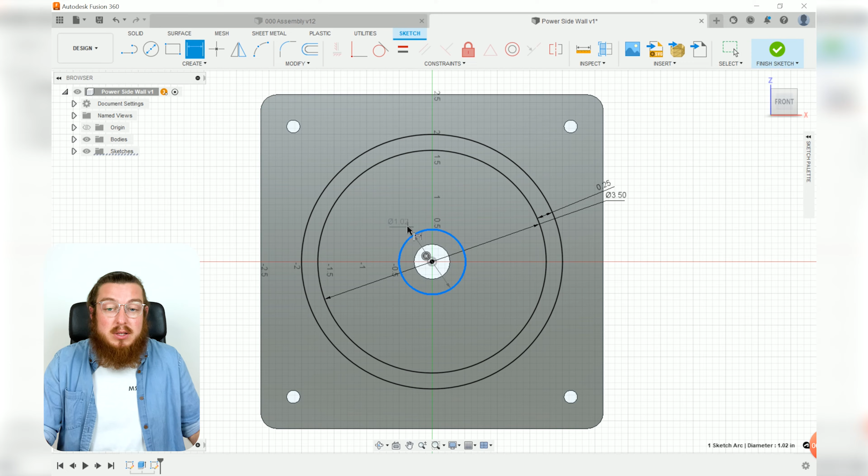And we also want to make a new sketch on the front plane of our piece, and we're going to be making 3 concentric circles. We're going to be making the internal circle 3.5, and then the distance between these 2 circles as 0.25. This is what is going to be mating with the housing that we have. And then this inner circle is going to be just slightly larger. It's going to be 5/8 of an inch, or 0.625. We are basically going to be having a recess on this face where the housing can slot into, and we're also going to be having a second recess where a bearing can be pushed into the middle here. Now the extruded ring can be cut in -0.125, or 1/8 of an inch.

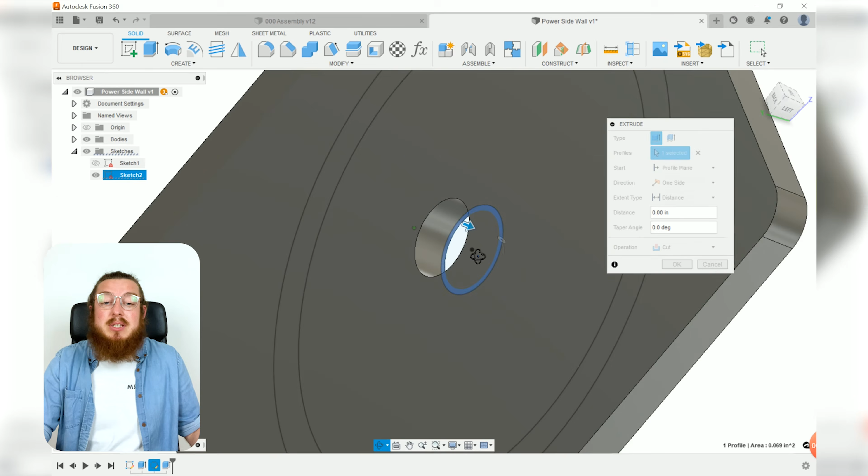So go back into your browser, expand your sketches and turn on the second sketch. And then we want to extrude this ring right here, but we don't want to extrude it in just normally. We want to actually have a certain offset, because we know the thickness of our bearing and we want our bearing to live on the outside. So we can set our profile plane to actually be an offset, and this offset is going to be -0.054 inches, and it's going to be cut all the way through. What that'll do for us is leave just a little bit of material so that our bearing is totally flush with this back wall, which is really nice. And then we can turn off that other sketch. Again, we want to make this a polished aluminum part, and then this component is all done.

We can save this and then go back to our assembly file, and this is going to be living on the back side of our component. So we can add in a joint to the inside edge of our power side wall and the outside edge of our gaskets. Perfect. And this can be revolved 90 degrees, 180, 270, doesn't really matter. As long as it's head on, nice and square and flat, that'll work just perfectly for us.

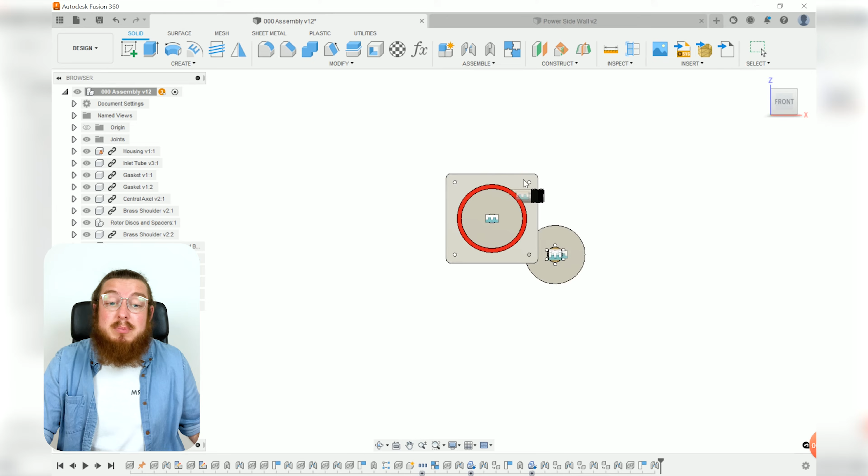Now we also want to make another component that is basically identical to our power side wall, but on the other side. It's basically just going to be a mirror image. Mirror image, mirror tool. So we'll go up to our create menu, select mirror, and make sure your type is set to components. We can then select our power side wall, and our mirror plane is just going to be our front plane essentially. And as soon as we click OK, not only is it already in the right location to add a joint, but all of the geometry is exactly the same as well. You'll notice if you go down to your browser that it now says power side wall mirror.

So you can always just select this and then double click it to rename it steam side wall, because we're going to be doing some degree of changing on this as well. Now we can go and work on this piece individually. So you can always select that component,

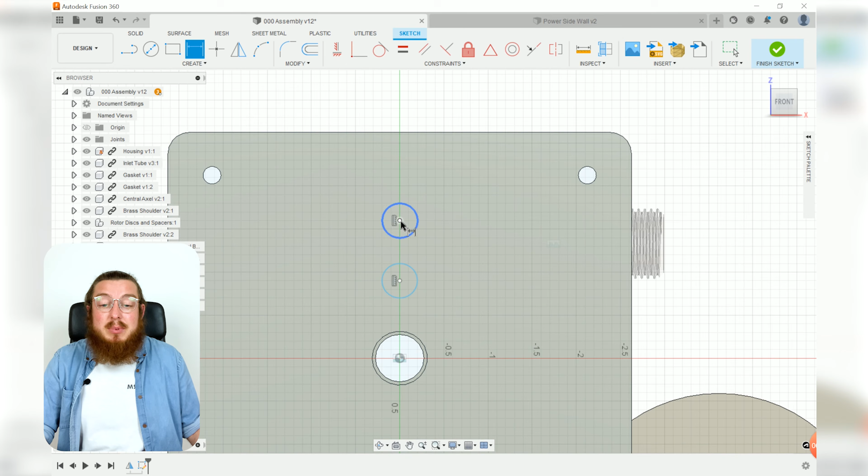make a new sketch, and then we want to make two sets of circles that are right on top of each other. We're going to be adding a vertical constraint to the origin and the centers of these two circles, and we can set the distance between the origin and the center of the top circle to be 1.25, and that is going to be having a diameter of 0.19. For the bottom one, the distance between the origin and the center of it is going to be 0.55 inches, and this is going to be having a diameter of 3/16 of an inch.

So now we can finish this sketch, and we want to make an extrusion cut, not through all, but actually just to the other side of this object. And then click OK, and this is where we can start to put in some of our patterns. So we want to be making a circular pattern of this bottom circle here about our green y-axis, and we would like 12 of these.

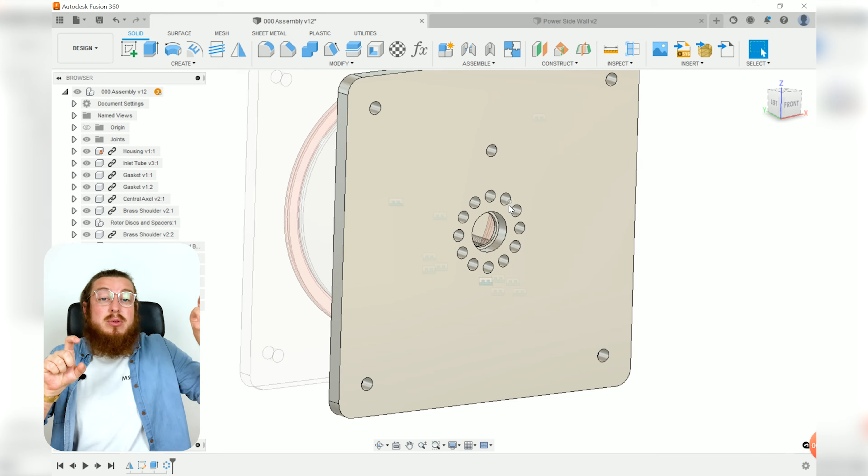And these holes are the outlet ports of all the steam coming out. We're going to be making a little funnel nozzle in a little bit, but we want to make sure that the total cross-sectional area of all of these holes added up is equal or greater to the orifice of the steam coming out. If these holes are slightly smaller than the combined surface area of the hole going out, then this is now a throttling point, and you're basically losing a ton of efficiency with your process. So we don't want to do that.

What we do want to do is add a threaded hole to this top section. This was going to be a 10-24 threaded hole. We also want to pattern the top hole and the thread it has as well. So we're going to go into circular pattern, change our type to features, and this will include both the thread and the extrusion. Now technically we are patterning this hole below it as well, but because we want to have only 6 holes of this, and 12 is divisible by 6, we won't cause any issues whatsoever, because we're basically cutting out the same hole where there is also a hole anyway, so no problems whatsoever there.

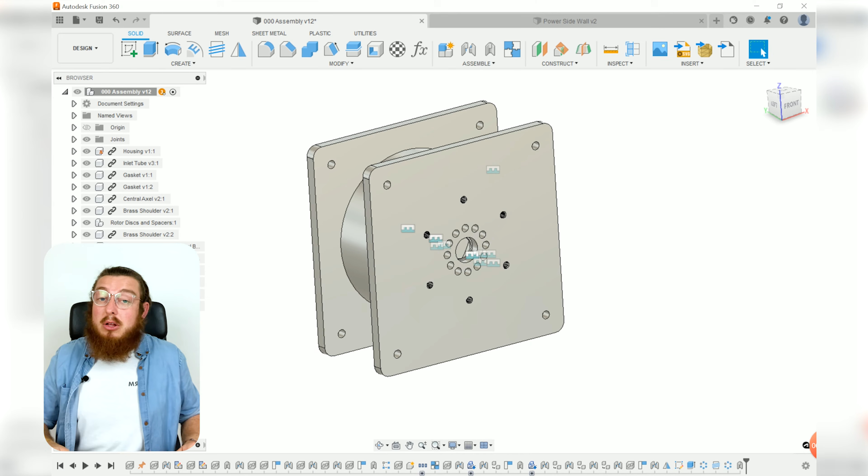So with this component totally done, we can actually go back and activate this top component and then add an as-built joint between it and really anything else that touches it. And this will be a rigid joint. And what you may not have noticed the entire time through working is that because we copy and pasted this, there is now a link between these, which makes this technically an internal component. So we could have made this as an external component or as an internal component. Both of them would do the exact same process.

Now the bearings that we have for these are also going to be from McMaster-Carr, so go ahead and type in your components and we can be downloading our step files. These are kind of already in the wrong location and orientation, so let's flip them around so they're looking a little closer to what we need, and then we can just add in a perfectly normal joint between our component, or our bearing in this case, and then the inside of that edge right there. That'll put it into place.

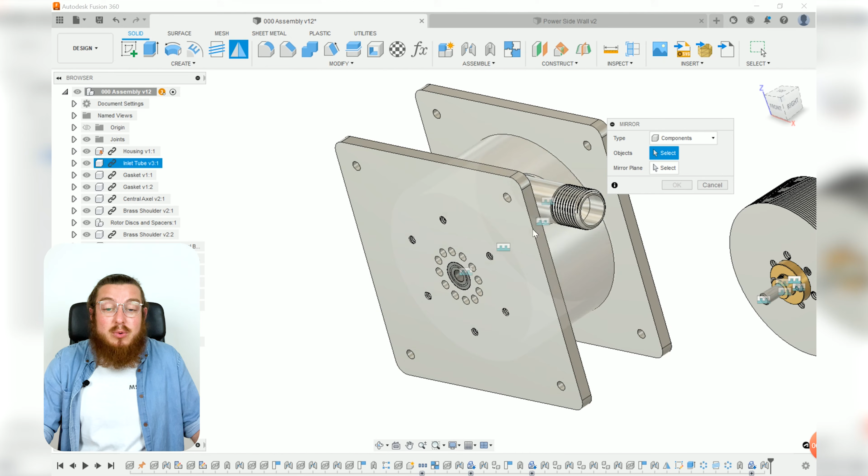Perfect. We can also do a similar thing that we did to the steam side wall, where we have a mirrored component, which would be our bearing, about our front plane. Click OK, and then this is already in the right location, but it's not locked in place, so let's add an as-built joint.

Now to apply pressure between the two walls to actually make a really good seal, we need to pass some bolts that go right the way through it. But what can really easily happen is as you tighten, you actually bend these metal plates inwards. That may cause a gap, and then steam can just rush out really easily, and then your two plates that you spent a long time manufacturing are trashed.

So what we need to do is put in some compression stems. These go by lots of different names, spacers if you'd like, but basically just a little cylinder that extends from this wall all the way around to the other wall that are also threaded. So when we pass some bolts through on either end and we know the exact distance that they're supposed to be, as soon as we bottom out on everything, it's already nice and good.

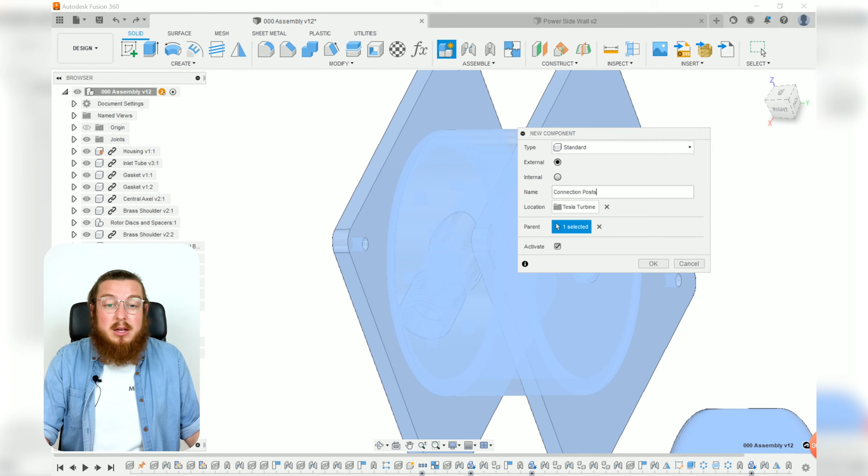So to make these new components, these are going to be external and they're going to be named connection posts. And we can actually make it in the edit in place window. We can make a new sketch on the inside face of one of these walls. That can be a little hard to see, but we're just going to be making a little circle that is 0.375 inches in diameter. And then click Finish Sketch.

We can now extrude both of these profiles and make them go all the way to the other surface. So we basically have a little cylinder that is the perfect distance in between both of these walls. And we can add on a little polished aluminum finish to that as well. And then we also want to add on some threaded holes on either end as well. So let's click H for hole.

And by clicking through this hole there, we want to select the top face of one of these cylinders, and we can click and move this to the origin. This wants to be a number 10 thread, or 10-24 to be precise. We do want this to be a modeled thread, and we really don't care if it has a little chamfer to it, but it would be nice. So let's make that 0.25 inches and the exact same 0.625 inches of depth.

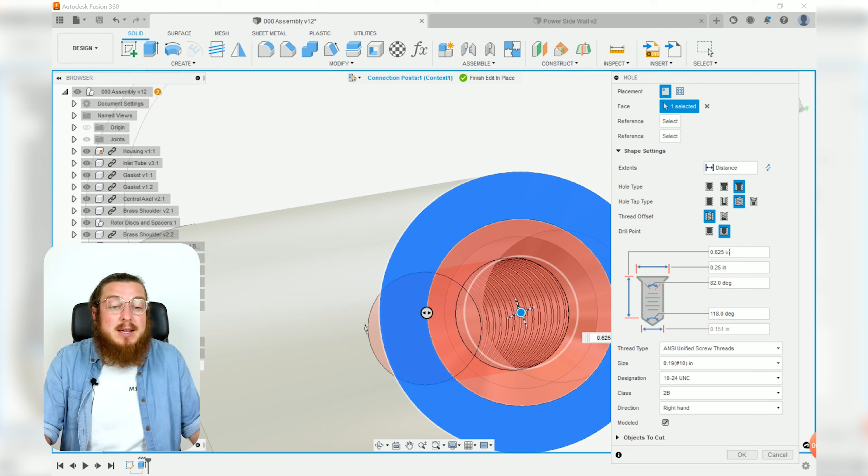We can also mirror this feature about the front plane, so add the mirroring tool. The features that we'd like to mirror is going to be that hole that we just made, and it's going to be about the front plane. There we go. Now we can finish this component, and then we can pop in the two bolts that are going on either side. Again, this is going to be a McMaster-Carr component, so we can go ahead and pop these in. We will be needing two of them.

So as soon as we pop them in, we can make one of them into the right location and then make the other one on the opposite side in the same way. So you'll notice that we actually only made one of these posts and then two bolts on either side. And that's because we have made everything about the origin. So instead of making three more posts, joining them up and doing all that process over again, we can just go into our create menu and add a circular pattern between all of these components.

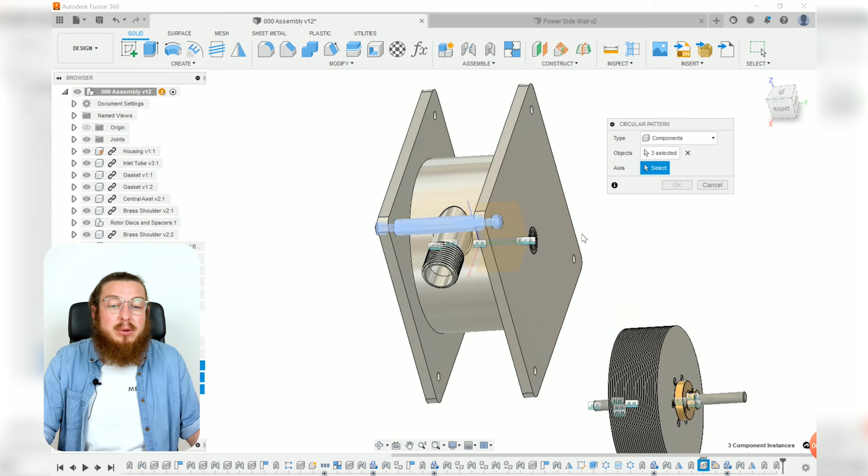So much easier. Saying exactly where the origin is, it dictates how I model things. If you can be kind of clever and have a bit of forethought about how your model is going to be manufactured, how it's going to be made, the best way to design it, and then put it in relation to the origin, it makes life so much easier. So we can set this to 4 times the quantity and then click OK. And then down in our browser, you can see we've got 8 bolts and 4 connection posts.

So these are all of them that we can actually pop in some rigid joints to. So we can click the top one, hold down Shift, click the bottom one, and then add in a rigid joint to lock all of them together. So now that we have our 2 sub-assemblies totally done, we can now put them in the right location. Now, obviously, we want to have our central axle have a revolute joint to our bearing. That's obvious. But exactly where does it need to be?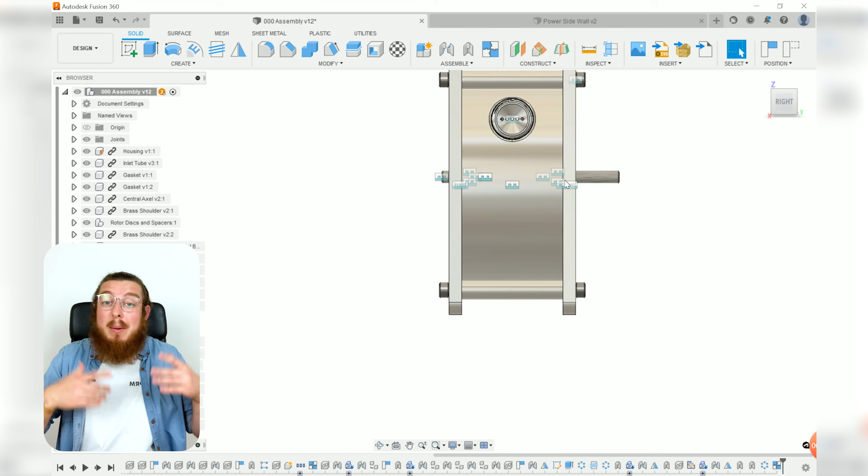We want to centralize it as much as possible, but how much on either side do we need to give a gap? And that's where we can actually do a little bit of an inspection using our measure tool up here. So I'm just going to go ahead and add a section analysis to the top plane, so we can kind of peer inside, and it'll be a lot easier to see what's going on. And the important thing to notice is that if I measure the distance between either wall of my bearing, and then measure the distance between my brass shoulders, and I subtract those two values, and then divide it by 2, that will give me the perfect distance that I need to move my brass shoulder, so it's exactly in the middle, which is exactly what I'll do.

So if I go to my measure tool, I can select my bearing wall, flick around to my other side, select that, and it looks like it's saying 2.106 inches. Great.

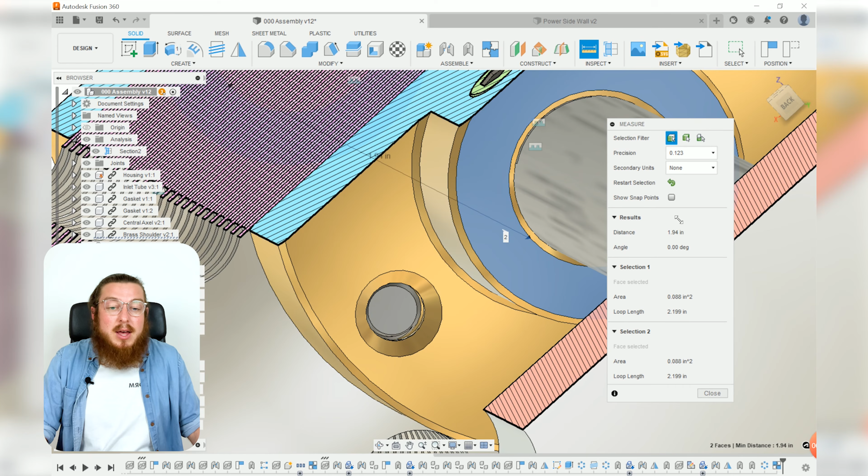So I can write that down, and then we can go back to our measure tool, go over to our brass shoulder, say, all right, then what is the distance from that wall, flicked over to that wall. And it's saying this is 1.94 inches. Great. So if I take those two values and divide it by 2, that will give me a gap of 0.083 inches.

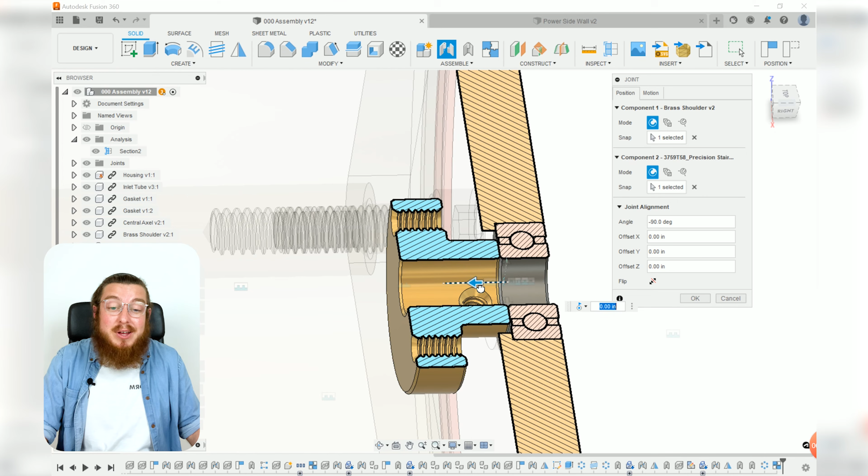So now if I go to my joint tool, I can then select that ring for the outer face of the brass shoulder, go around, do the similar thing to the little bearing right there, but this will give me a rigid joint, which we don't want. We want this to be a revolute joint. There we go. That'll give us a little animation of it spinning around. Perfect. So before we click OK, we need to move this over. We need to pull it over 0.083 inches, and that'll give us the perfect gap on either side that we're looking for. And then by clicking OK, there we are.

Our two sub-assemblies are now one. Perfect. And we've got a nice and even gap on either side. And because we added a revolute joint, you can actually grab this and spin it around. It's got the top chopped off, but you can kind of see exactly what's going on. So by turning off the section analysis, we've basically got our axle that is totally secured in CAD, but not in real life.

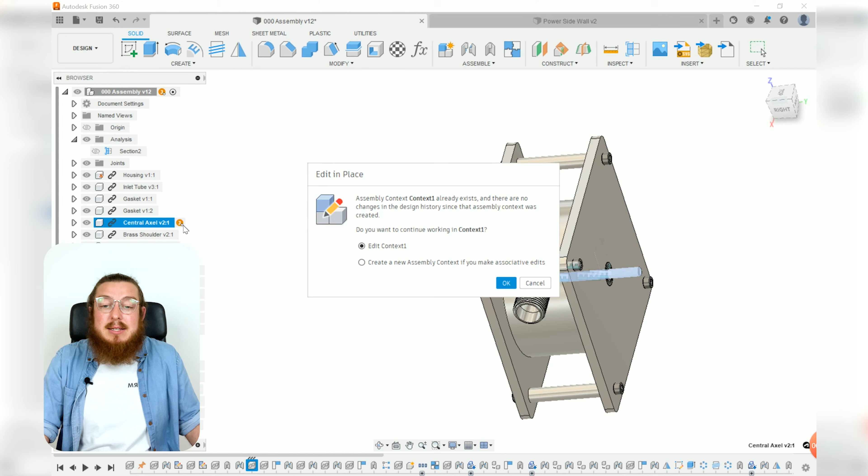We need to add two more components, something called a retaining ring, which basically is a little C-shaped bit of metal that can go around our axle, and it prevents it from moving side to side. This is where we can put in a little bit of edit in place magic, where we can cut out a groove based on the components that we already have in place, and then pop in the correct components. So we're going to go over to the central axle on the browser, and we're going to be clicking the edit in place window. That's fine.

Then we can make a brand new sketch that is on the top plane, right there. And we are going to be projecting either wall of the power side wall and the steam side wall. This will allow us to basically make sure that our grooves are exactly snug to either side of the wall. And we're just going to be making two small rectangles on either side. And these are going to be having equal widths, equal heights, the whole deal. And then we also want to add a collinear relationship between the bottoms of both of them. We also want to be adding a collinear relationship between the left-hand side and the right-hand side of both of the walls.

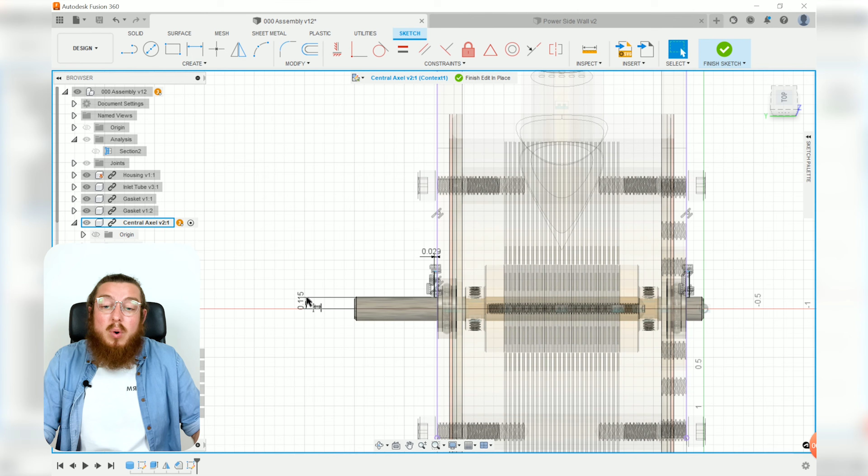Now the width of this cut is going to be 0.029. That's the same thickness as our retaining rings that we're going to be putting in there. And we also want to say the distance from the very bottom of this groove to the origin, this wants to be 0.115 inches. So it cuts in just a little bit. And then we really don't care how tall this rectangle is, as long as it's above the top of our central axle. We can click Finish Sketch now, and then make a revolution cut of both of these profiles about our green y-axis. And then click OK, and now we've got nice square grooves in all of this.

Now we can bring in that retaining clip, or actually both of them, by inserting the component from the McMaster-Carr plugin. Go ahead and download it and bring it over to one side. And then you can rotate it to make sure it's in the correct orientation. And then we can go ahead and add a joint between one of the rings of our retaining ring and then the outside of the groove as well. And we don't need this to be a revolute joint. In real life it can free spin, but it isn't super necessary. So if you want to, you can just make this a rigid joint as well.

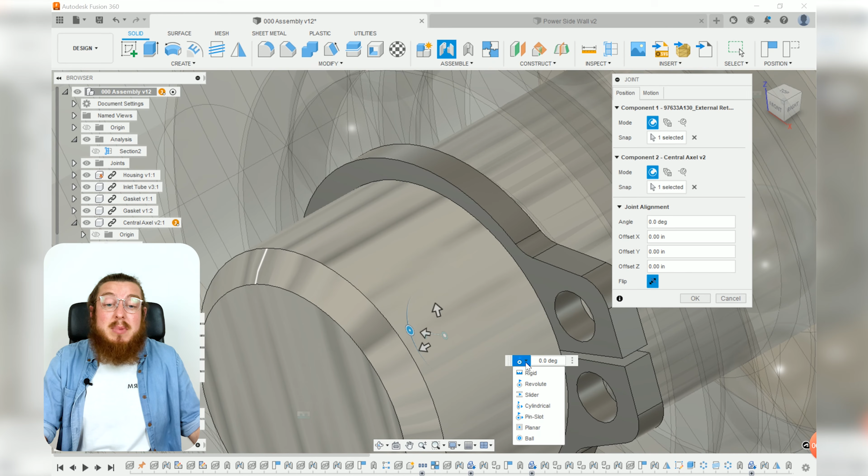And then we can click M for move, select our component, which is going to be our retaining ring. I would like to create a copy, and then we can just bring this part out to the other side and then make a similar joint to lock that in place.

Now our last two components that we're going to be making will be a gasket that goes around the outlet and then an outlet nozzle. So we'll start off with the gasket by making a new component. This one is creatively called outlet gasket. And this is going to be made in the edit in place window, but by creating a sketch on the steam side wall on the outside face.

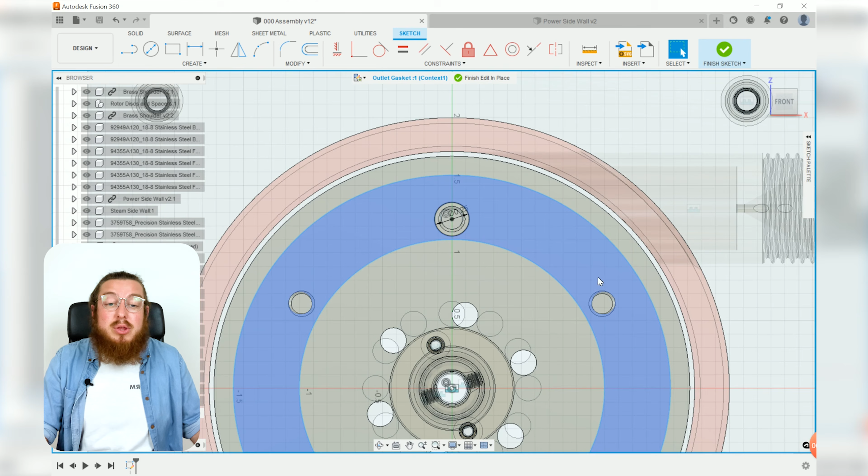And we are going to be using a set of circles starting from the origin to define the outside of the gasket, the inside of the gasket, and then we're just going to be making a very simple 1/4 inch hole that passes around one of the threaded 6 holes that we have. We can dimension this inner circle to be 1.55 inches. 1.55, there we go. And then the outer one to just be 3 inches normally.

And then we are going to be extruding this, just this profile, at 0.03 inches, just like we did for the other gaskets. And then that can receive the exact same soft rubber appearance that we had for the other ones. Again, we can make this a lovely little red, add some color to the design, which we always like. Now with this component done, we can just put in an as-built joint to lock it in place.

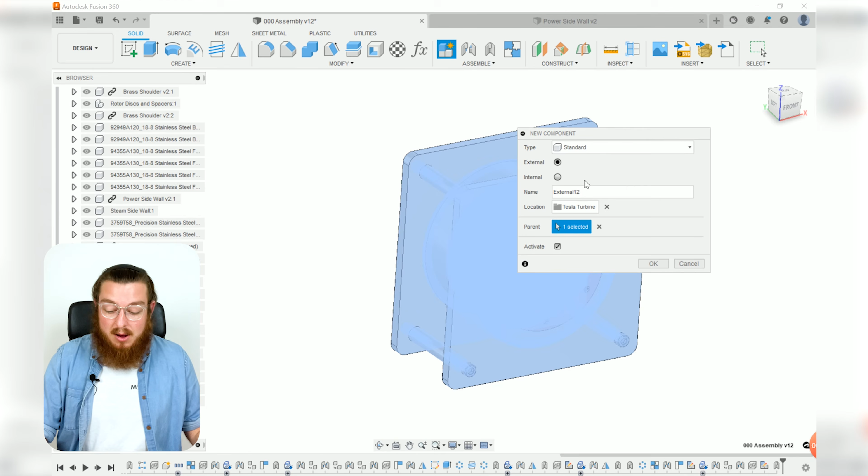Now for our last component, this is going to be our outlet nozzle. And we are actually going to be making this as its own separate file. So let's go ahead and say finish edit in place, save this whole assembly, and then go off to our file out here. And we're going to be clicking on the outlet nozzle right there.

Now for this object, we are going to be making a sketch on the right-hand plane, and using our line tool, we're going to be starting by making a vertical line just above the origin, going down at an angle, horizontal again, and then just following that profile up and around. This line wants to be horizontal, and oh, it's already done it, but these 2 angled lines are going to be parallel, and we can just put in all of our dimensions. So let's go ahead and finish this sketch and then revolve that profile about the green y-axis. That'll give us this kind of funky funnel shape.

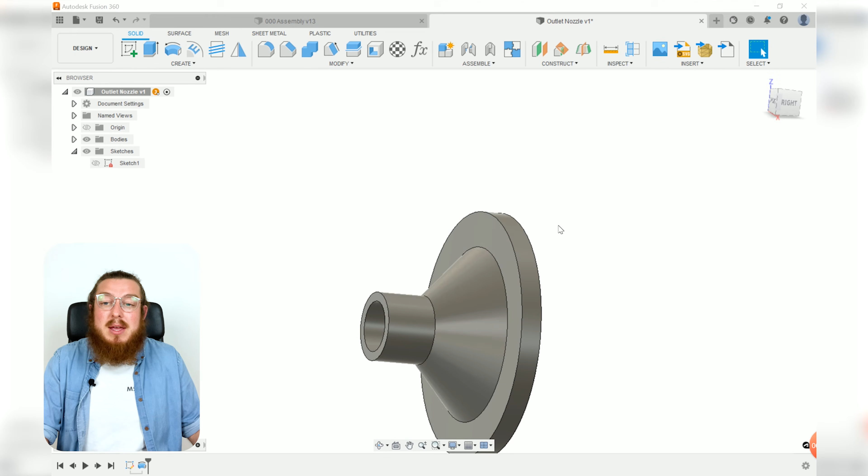And then we'll want to make a new sketch on the backhand side. And this will be a very simple circle that is 0.25 inches in diameter, is vertically constrained to the origin, and can be found 1.25 inches from the origin. There we go. Now we can go ahead and extrude this profile all the way through our piece. And then just like the gasket and the other threaded holes in our steam side wall, we would like to add a circular pattern. Our features that we would want to pattern would be that extruded hole all the way about that green axis. We want 6 of those babies.

There we go. We can add a very light chamfer by highlighting the entire piece and setting it to 0.02 inches. And then we can add on our polished aluminum finish to it. That's great. And then because this is an outlet, we want to be able to put on another pipe thread onto there. So that's why we can add on a little thread onto that section right there. We can change this to an ISO pipe thread, model it, and then click OK.

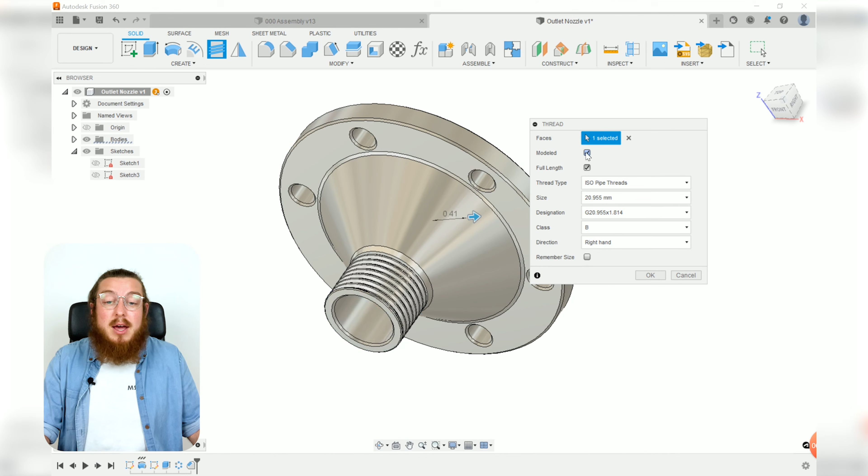And this component is all done, so we can just save this part, go back to our assembly, and update it. So we can grab our component and then add a pretty normal joint to this, where we can say, yeah, it should line up with the gasket, or the holes should line up nice and neatly. And because we already made it in the correct orientation, there won't be any twisting artifacts to worry about.

Now the last thing to do is add on 6 bolts that go through the gasket into the steam side wall. Conveniently, we can actually just use the bolts that we used previously for our connection posts. So let's click M for move, select any of the bolts you'd like. I would like to create a copy, and then move it out of the way. Then we can add in a perfectly normal joint to just one of the holes on the outlet nozzle.

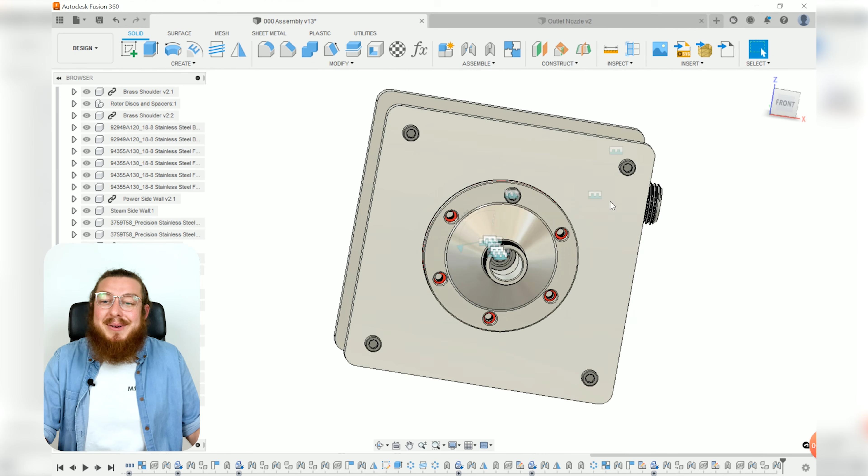And with the power of circular pattern, we are going to be adding a circular pattern from this component and rotate it 6 times about the green y-axis. And that will evenly space all of them perfectly. And then we can just add on a rigid group between not only our outlet nozzle, but then also these extra 5 bolts that we patterned, and then clicking OK. And this part is all done, so we'll give this another section analysis so we can take a look at the inside of this, and we have a fully functioning Tesla turbine.